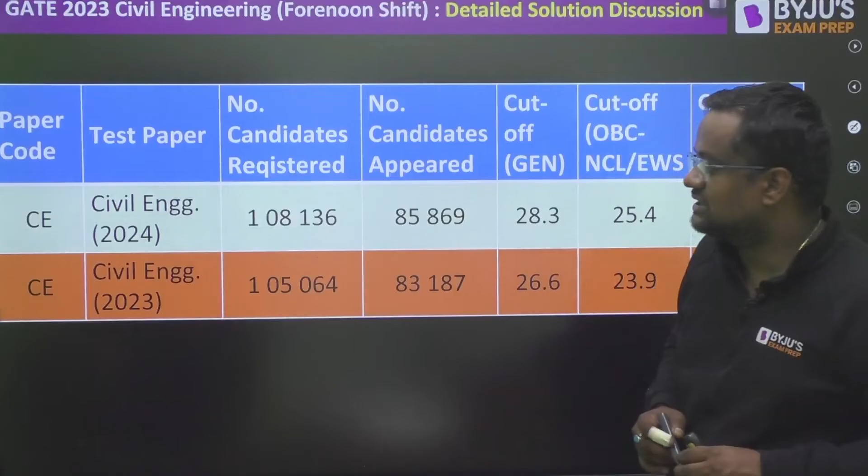This year IIT has declared that the total number of students registered for civil engineering is 1,08,000, and out of them, 85,000 students appeared for the examination. Compared to last year, more registration and more students have appeared.

In engineering services, almost 1/3 of the registered students appeared for the exam. Of course the exam is very big, so 2/3 of the students don't even go for the examination, but here the drop is around 15 to 16%.

Talking about the cutoff, the cutoff for general is 28.3 this year, for EWS and OBC it is 25.4, and for SC ST it is 18.8.

Of course, just clearing the cutoff will not help. You might get an NIT, but not of your choice or specialization. For getting IITs and PSUs, you should be scoring much higher than that.

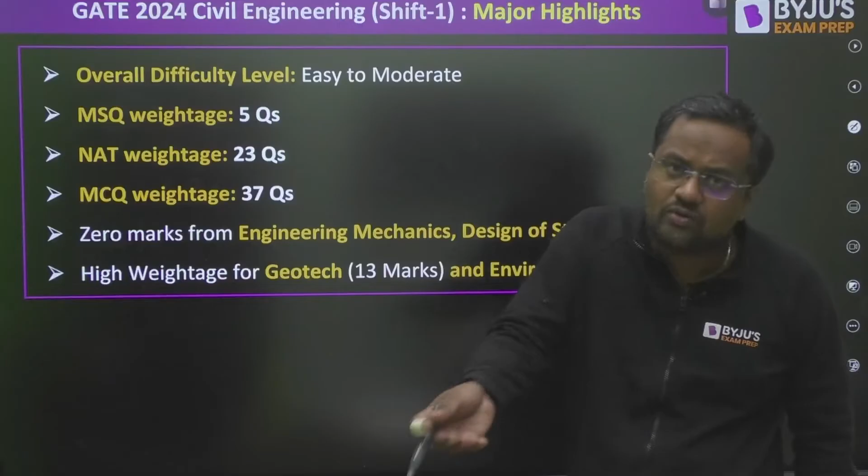Now about the paper, compared to 2023, in 2024 the paper was relatively easier. I'm not even saying moderate, it was relatively easier. The total number of MSQs were 5, NAT were 23, and MCQ questions were 37.

There was no question from engineering mechanics and design of steel structures in paper 1, and high weightage of geotech, which is expected, and environment, which is almost expected every year.

This is the analysis of paper 2. Of course, in the paper 2 video, when we do the complete 65 question solution, I will be discussing this in detail.

Now about the number of questions of each subject, aptitude is fixed, that has to be 15 marks, that is a guideline. Apart from that, everything is as expected.

Engineering mathematics was not of 13 marks, it was of 11 marks. Strength of material was 7 to 8 marks in both shifts. Engineering hydrology was 3 to 2.

Engineering mechanics had no question in paper 1, the forenoon section, but in paper 2 it was a 2 mark question. Geotechnical is the highest of all, 14 and 13. So this is the weightage.

In structural analysis there is no question in paper 2. Let me tell you one more thing here: if you see some other reference, you might feel some discrepancy from here. The data may be different because certain questions can be put in engineering mechanics category also, can be put in strength of material category also, and same for other questions in other subjects.

Like a question of well hydraulics, pumping the well, can be considered as a geotech question also, can be considered as a hydrology question also. So there may be some changes.

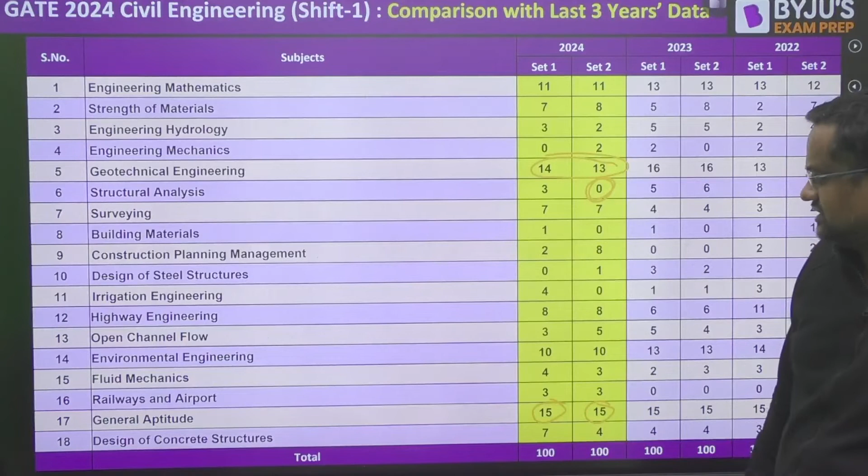So this is the weightage of each and every subject for 2024, and it is more like expected - environment and geotech are on the highest weightage, and subjects like CPM, building material, irrigation, steel are in lesser weightage. It is as expected, which is the average of the previous years as well.

Now in this video we'll be doing the complete solution of paper 1, complete 65 questions, which includes all subjects, mathematics, aptitude. So the complete video, these 65 questions, will be done in this video.

Also, if you want a reference of marks versus rank for 2024: at 85 marks the student is getting rank 1, around 70 marks you are getting rank 170, for 600 or 700 rank the marks is 60, for 1500 rank it is 53, and so on for others. You can take a reference from here.

Now the solution of forenoon aptitude will be done by Rakesh sir, and then we will be coming to the technical and engineering mathematics part. Complete 65 questions will be done. Thank you guys.

Let's get started with the discussion of general aptitude, 10 questions in the beginning, and then later on the technical questions along with engineering mathematics will be taken up by different faculties. Verbal won't take much time, let's spend time on reasoning and quant, that is where you need to understand.

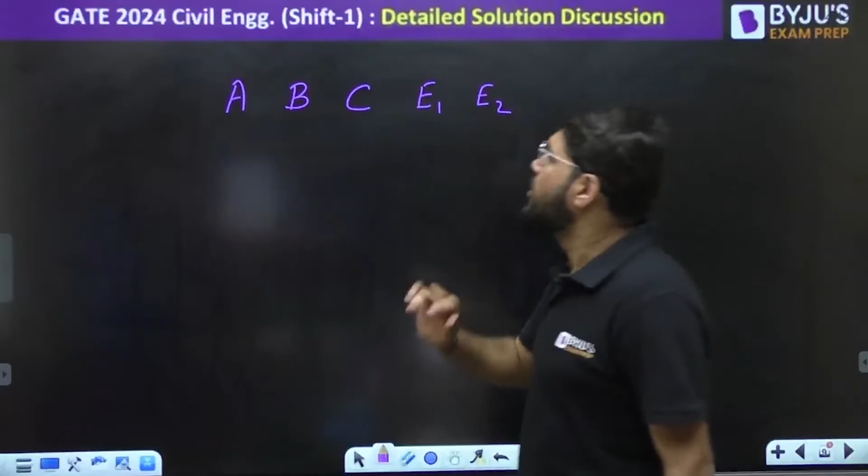Now the empty positions are also identical, na? Empty chairs - let's not call them E1, E2, let it be EE only. Hey, empty to empty, na? We cannot distinguish that also - like we cannot distinguish twins, we cannot distinguish the empty positions also. It is the same and same only. Done, hai ji?

Done, hai ji? Okay, fine. Empty, empty, empty - so we have A, B, C, E, E. These are the 5 bodies to be seated in the form of a circle. Okay, dekho.

Five units. Circular arrangement of 5 units is given by factorial of 5 minus 1. Circular arrangement of n items is given by factorial n minus 1. But out of which...

2 are alike, this E and E is same. A different, B different, C different. But these 2 empty spaces, you can't distinguish, they are same.

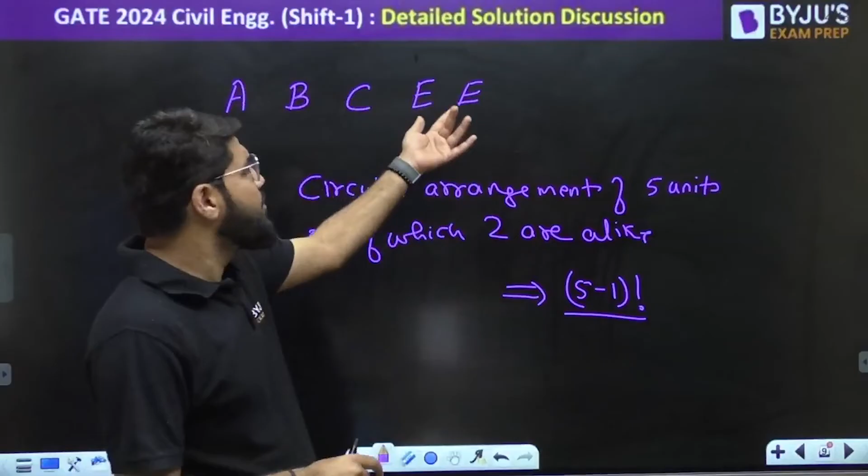So whenever 2 bodies are same, like we saw how many words can be formed using the letters of the word tattoo, where the letters are repeated. Similarly here, EE is repeated, 2 times, so divided by factorial 2. Factorial 4 is 24, divided by factorial 2, it is 12.

This is the simplest way of solving. Otherwise, like this, you will keep solving.

Now here also, this is one possibility I told you. Then ABC can be shuffled, A, B, C, or A, C, B. There will also be multiple possibilities. So then next, these 2 spaces here, then I told you a space maybe between B and C also. So if you form these cases, then also 12 will come, but that is lengthy.

This was just for explanation, that is the simplest way, logic of solving the question. Answer is option number A. The correct answer is option number A. I'm done with it. The correct answer is option number A.

12 came, correct. Number 8. Oh, a question on data interpretation.

The chart given below compares the installed capacity in megawatt of 4 power generation technologies T1, T2, T3, T4 and their electricity generation in megawatt hour in a time of 1000 hours. The capacity factor of a power generation technology is defined as electricity generation in megawatt hour divided by installed capacity into 1000, because that is for a time of 1000 hours. Which of the following technology has the highest capacity factor?

Let's keep it simple. What is the capacity factor equivalent to? It is equivalent to, since 1000 is constant, electricity generation. Now if you come to this bar chart, electricity generation is noted by cross, and this capacity factor is proportional to this cross divided by installed capacity.

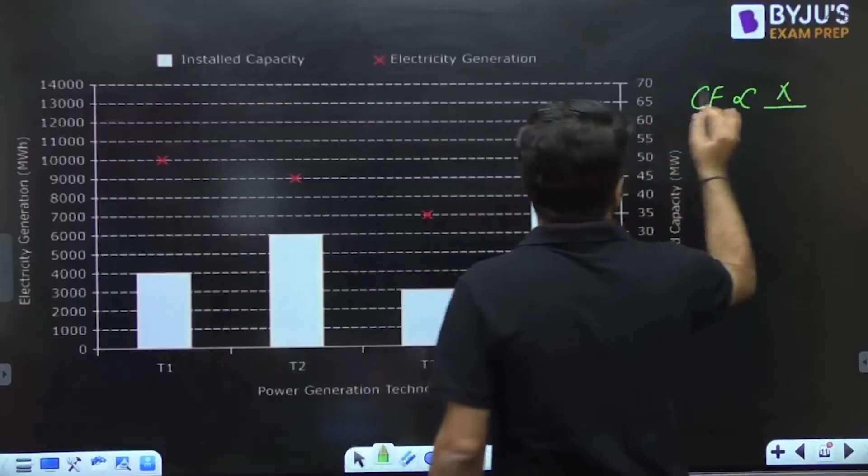This is electricity generation divided by installed capacity. What is the installed capacity? That is represented by the bar. Clear? I'm not dividing by 1000, because that is why I'm writing proportional to, since I don't want the absolute value, I want to know where it is highest, and 1000 will come in all of them anyway.

Let us calculate the ratio of cross and box for T1, T2, T3, T4. For T1, how much is it? Cross 10,000 upon 10 by 4, 1000 also cancels, so 10 by 4. The ratio will be 10 by 4.

For T2, that is 9 by 6, that is 1.5. T3 is 7 by 3, so this is 2.33. Writing it down, this is 1.5, this is 2.5. And T4, what is the value of T4? It is 12 divided by 8, that is further 1.5.

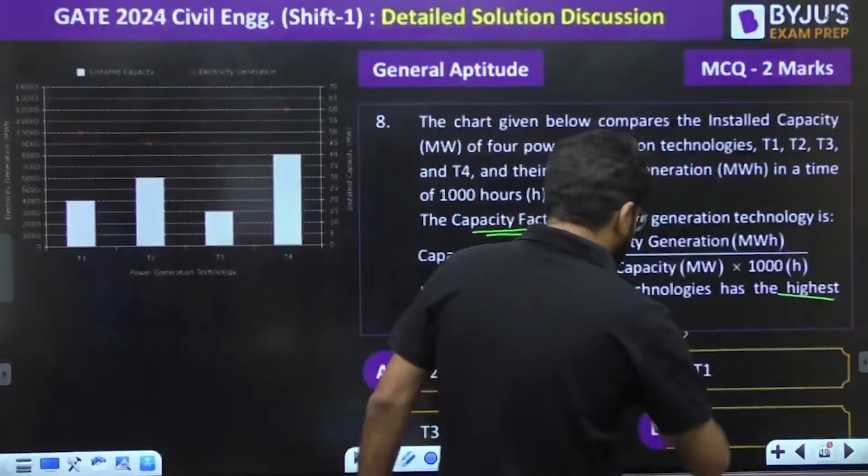So which of them is the highest? T1, it is highest for T1, 2.5. The answer is B, T1. Done? This is also a very fundamental question of DI, just like a reading comprehension. Just have to read and see which is the highest, calculations are also minimal only.

Next, ninth one. In the 4x4 array shown here, each cell of the first 3 columns has either a cross or a number, that's what is visible, as per the rule given below. What is the rule? Please highlight that rule: the number in a cell represents the count of crosses around its immediate neighborhood cell.

Now what is the neighborhood? Left, right, top, bottom, diagonal, anything. Like suppose if this is a box, complete neighborhood, so this is like all four directions. Neighborhood means anywhere around it. So what is that rule? The number in a cell represents the count of crosses around its immediate neighbor. As per this rule...

The maximum number of crosses possible in the empty column, how many crosses can be here? Come on everybody, very simple analysis question. Now like here it is 1. I'll explain you again. Here it is 1 means in its neighborhood, look, this is its neighborhood.

Yahan to kuch hai hi nahi. So in its neighborhood there should be 1 cross. Yes, there is only 1 cross.

Okay, like this entry is 2. So this is the neighborhood of 2 and around it should be 2 cross. Yes, these are the 2 crosses like that.

Okay, so now here 2 is written. So around it there should be 2 crosses. What is the neighborhood of 2? Okay, ye aa jayega poora. This is the neighborhood. Diagonals are also included na.

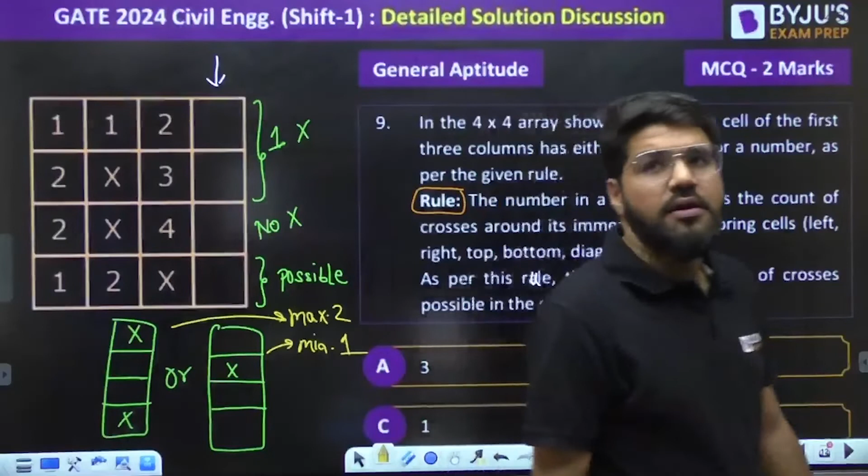Next question, 10th one for the aptitude. Okay, now during a half moon phase, the earth, moon, sun form a right angle triangle. Okay, the only good thing is this understanding of language, a very fundamental question. Okay, so many students felt that it is difficult.

Isme data kuch aur chahiye hoga ki no, it is a very basic question. Dekho, during a half moon phase, the earth, moon, sun form a right angle triangle. Okay, so let me also form it. Okay, earth, moon and sun.

Earth, moon and sun, they form a right angle. If the moon earth sun angle, okay, moon earth, chalo, let me place the earth here.

If the moon earth sun angle at this half moon phase is 89.85, this angle, it has to be extremely big. I mean, if I delete everything, the picture is something of this kind. Okay, this is also a big angle.

Okay, so let's say this is the moon. Okay, and this angle 89.85 degree is coming up, okay, at the moon earth sun. Okay, so this angle is going to be very negligible. Okay, and this is a right angle.

Okay, then what is the ratio of the earth sun? Okay, earth sun. Okay, this is the earth sun. Okay, and the earth moon, let me call it as EM. What is the ratio of these two distances?

Hello dear students. So after this aptitude section of total 10 questions, now let us do the technical part. I'll be taking subjects like strength of materials, then surveying, highway engineering, railway, airport engineering. And then of course after me, Chandrasekhar sir and Richa ma'am will be taking other subjects. So total 65 complete questions will be done. And of course guys, as we are recording this video after the updated answer key, in questions where MTA or the range have been increased, we'll be telling about that as well.

Let us begin with SOM guys. This was an MCQ question of 1 mark, asking to find the maximum shear stress. As guys, they have given the stress tensor in 3D, that means they are asking for tau absolute maximum, because the stress tensor is in 3D. So tau absolute maximum is given by the maximum of (sigma 1 minus sigma 2)/2, (sigma 2 minus sigma 3)/2, (sigma 3 minus sigma 1)/2. This is the tau absolute maximum.

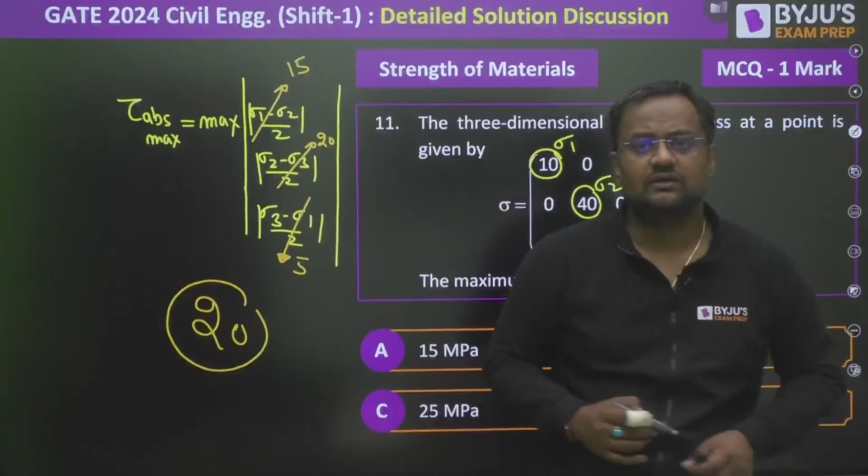As all the shear stress values are 0, therefore these are the principal stresses: this is sigma 1, this is sigma 2, this is sigma 3. So sigma 1 minus sigma 2, that is 10 minus 40 by 2, is 15. 40 minus 0 by 2 is 20, and 10 minus 0 by 2 will be 5. So maximum of 15, 20 and 5 will be 20. So guys, the answer to this maximum shear stress MCQ question will be B, that is 20. Everyone can score 1 mark easily here.

Now guys, question number 12, we have to match the correct pair. Let us first see P. Here sigma x is 10, sigma y is 0. Center will be (sigma x plus sigma y)/2. Guys, center is given by ((sigma x plus sigma y)/2, 0). Center is always on the x-axis.

And radius is given by either (sigma 1 minus sigma 2)/2, or the more general form: square root of [(sigma x minus sigma y)/2 squared plus tau xy squared]. This is more general because if tau is 0, then it reduces to (sigma 1 minus sigma 2)/2. So for P, the center will be (sigma x plus sigma y)/2, that is (10 plus 0)/2, which is 5. And radius will be square root of [(10 minus 0)/2 squared], that is 5 squared plus 0, so it is under root 25, giving radius 5. So this represents center (5,0), radius 5, so the diameter spans up to 10 here.

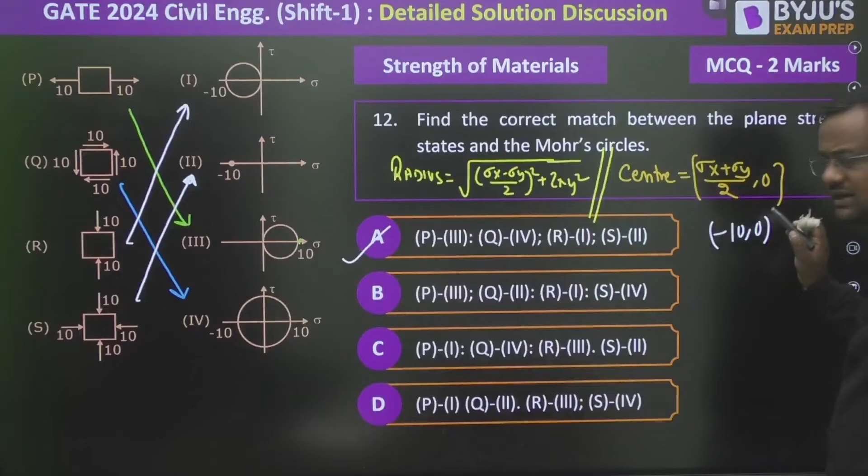It is of 2 marks, but compared to 2 marks, it is not that tough. Those who have done a reasonable preparation can do this question easily.

Now guys, question number 13. Here we have to find these reactions. So see, this will be RA, let this be RB, let this be RC.

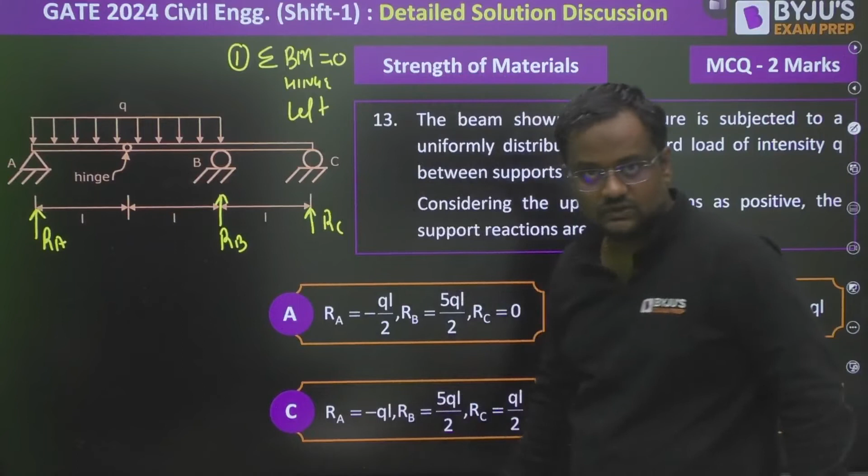Now whatever equations we have, the first equation is that summation of bending moment at the hinge is equal to 0. So do this from the left, you will directly get RA. Let me show you guys.

Taking bending moment about RA: RA into L, and this total is QL, downward means negative. QL into L by 2 is equal to 0. So RA value is equal to QL by 2.

So even from the RA value, this and this will not be the answer. Only B and D can be there. This is the first equation.

Second equation: summation of moment, not bending moment guys - bending moment at the hinge is 0, but at any other interior point, moment will always be 0 for equilibrium. So summation of moment at B is equal to 0. This you have to take from left and right both, because it is moment, not bending moment. For bending moment we only took from the left. Moment at every point will be 0 for equilibrium.

So here, in this equation only RC will be coming. So you can find RC from here.

Now this is the second equation, and the third equation is summation Fy equal to 0. So RA plus RC plus RB is equal to downward load Q into 2L. RA and RC are fine, so you can find out RB from here. So guys, B will be the answer from these three equations.

Question number 14. A homogeneous shaft was given, both ends fixed. The polar moment of inertia of portion PQ is J1 and of QR is J2. Support reactions are TP and TR. Let the TP value be here as torsional vector, and let TR be here.

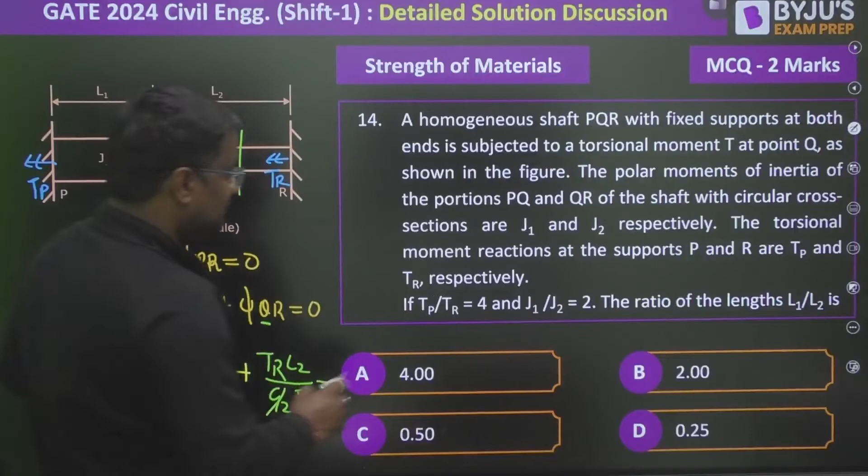Homogeneous, so G1 and G2 are same. Now TP is 4TR, so TP I can write as 4TR. 4TR L1, and J1 I can write as 2J2 from here. 2J2 is equal to TR into L2 upon J2. J2 cancelled, TR cancelled. From here guys, L1 by L2 value is 2 by 4, that is 0.5. That is option number C.

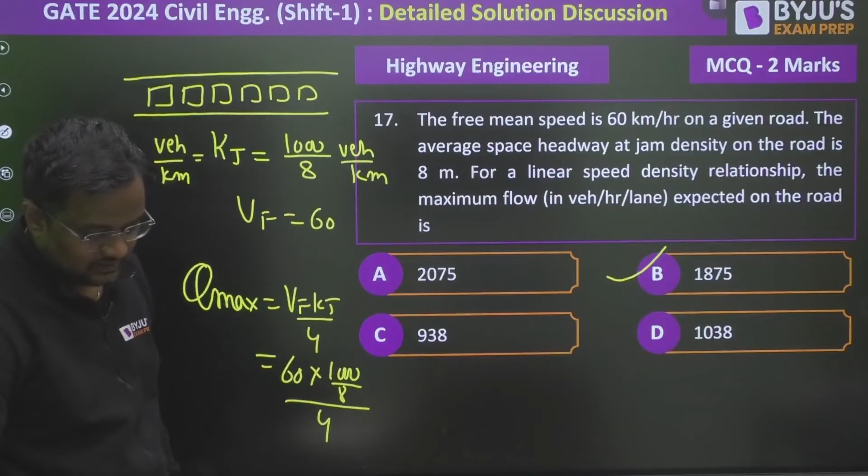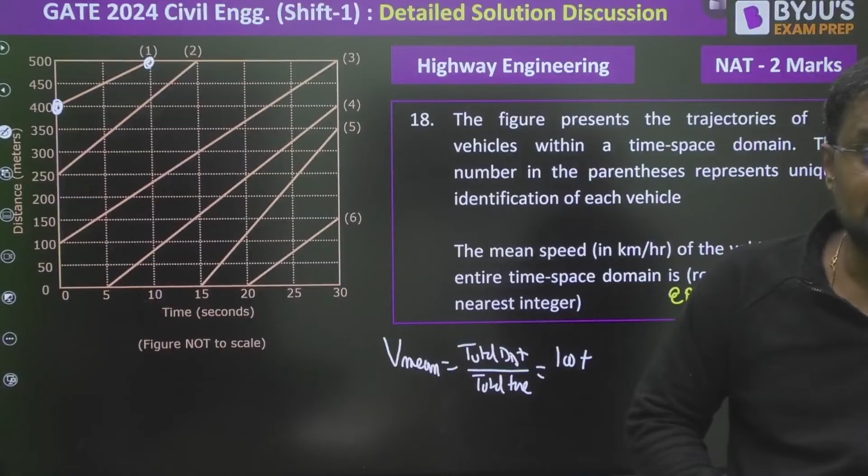Okay, so guys, here the mean speed is calculated as V mean equals total distance by total time. So the distance, this is covering from 400 to 500, it is going from 400 to 500, so 100 distance. 400 meters, the vehicle A was there and it has gone to 500, so distance is 100. Now what is the time it's taken?

It starts at t equal to 0, and at t equal to 10 seconds the journey ends. So guys, it is taking 10 seconds. Now let me talk about the second vehicle.

It starts from 250 and goes to 500, so it is going 250 meters. And how much time is it taking? From 0 to 15 seconds.

Now the third vehicle goes from 100 to 500, so how much is it going? 400. And how much time is it taking? From 0, it is covering to 30 seconds.

Now the next vehicle is going from 0 to 400, so the distance traveled by the vehicle is 400, and the time is taken from 5 to 30, so it is 25 seconds. Now after that, the next vehicle is from 0 to 350.

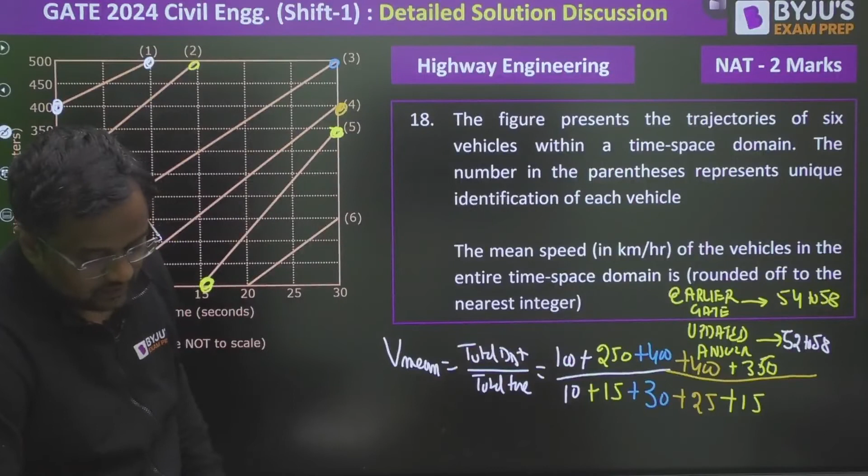Okay, and how much time is it taking? 15 seconds. Okay, now how many for the last vehicle? Last vehicle from 0 to 150. So 150, and how much time is it taking? 10 seconds. Okay, so guys, from here the average speed you will be getting is 15.7 meter per second.

These values are in meters. So you will be getting 15.7 meter per second. Okay, and if you convert 15.7 meter per second into kilometer per hour, this value comes to 56.57 kilometer per hour. And they have taken the reading as 52 to 58, the updated answer.

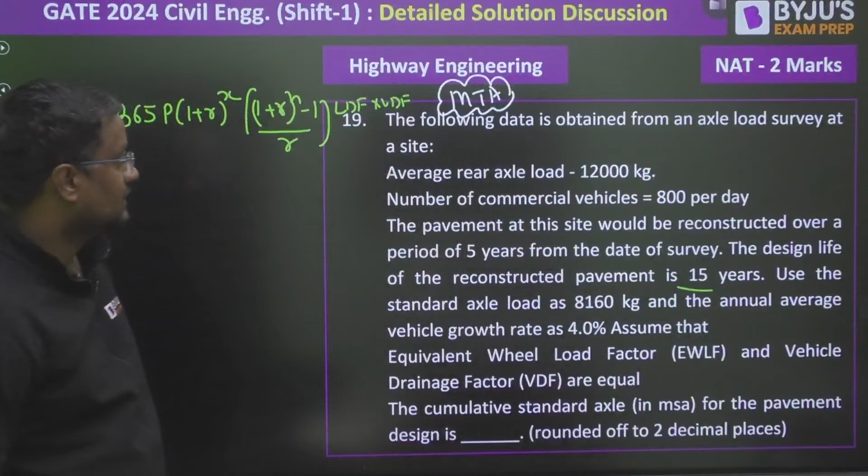Present traffic R is given as 4%. N is 15 years, so (1+R)^N. Number of commercial vehicles is 800 present traffic. Construction period is 5 years. So everything is given. And what is VDF?

VDF, they have asked that you can take as the equivalent wheel load factor. What is equivalent wheel load factor? 12,000 and standard vehicle is 8160. So VDF you can take as (12,000/8160)^4.

LDF was not given. Although some students have taken it as 1, but majority of students have challenged that if LDF, the lane distribution factor, is not given, why should we take it as 1? That is why it was marks to all. Otherwise the correct approach is this.

Okay, now building material, guys, this was an MSQ. The elements that do not increase the strength. Carbon increases the strength, guys. As carbon percentage increases, the ductility decreases. In less carbon percentage, it is more ductile. In more carbon percentage, Young's modulus is the same, but it can take more stress, but ductility is less. Again with more carbon, it can take more stress, but again ductility is less. This less carbon percentage fails at maximum strain.

Okay, so guys, carbon and manganese are the things which do not take any effect, oh sorry, they do change the strength. The correct answer will be chlorine and sulfur. They do not increase the strength. Chlorine and sulfur will be the correct answer.

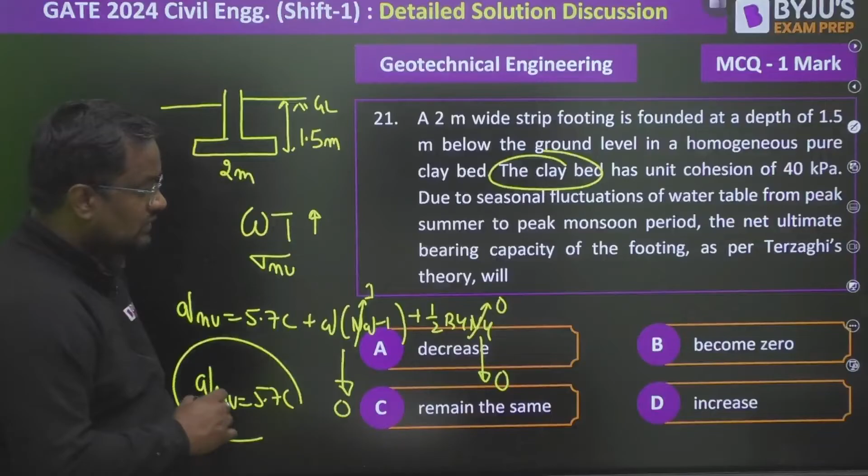In monsoon period, water table will increase. Then what effect will be on the net ultimate bearing capacity? Now guys, the formula of the net ultimate bearing capacity for clay is 5.7C, because the Nq and (Nq-1) term, and Nq for clay is 1, so that term becomes 0, plus half B gamma Nγ, and Nγ is also 0, so these terms become 0 and 0, so it is only 5.7C. So there is no effect of water table in this first term. So Qnu is 5.7C. There is no effect of water table here, so it will remain unchanged, the same. In clay case, guys, even if you take the monsoon season or dry season, that will not change. It will be the same. That is option C.

Now moving to next question, geotechnical. Again an NAT question of 1 mark. Let me remind you, there is no negative marking for NAT and MSQ questions. An embankment is constructed with soil maintaining degree of saturation at 75%, so S value is 0.75 during compaction. The specific gravity of the soil is 2.68 and the moisture content is 17%, that is 0.17. Consider unit weight of water - unless mentioned, we always take unit weight of water in any subject, whether fluid mechanics, hydrology or soil mechanics, we take 9.81, but here it is given as 10, so we will take 10.

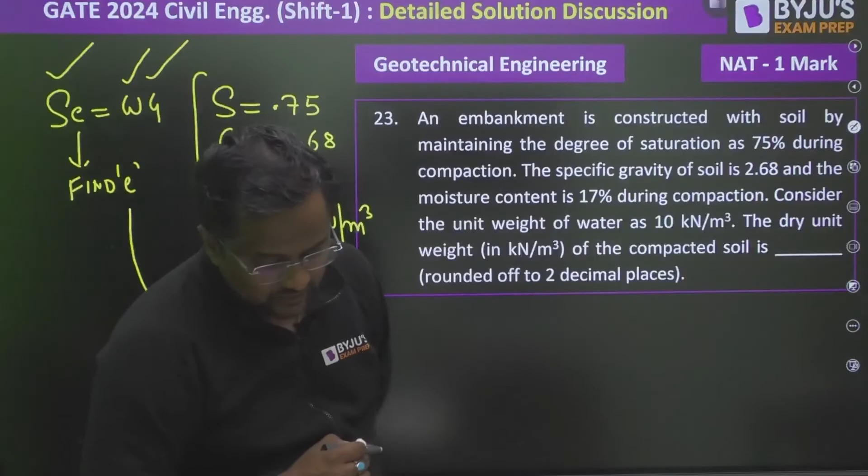What is gamma D? Gamma D value is G gamma W upon 1 plus E. Now G is known, gamma W is known, E we have to find out. From these three terms, we know SE is equal to WG. S is known, G is known, W is 0.17. Find E from here, and once you find E, put it back to get gamma D. That value comes to around 16 point something. As per IIT, the range given is 16.6 to 16.8. From here we get the value around 16 point something in that range, rounded off to 2 decimal places. So 16.60 to 16.80 is given - any 2 decimal value in between will be treated as correct, like 16.63, 16.65, any value will be taken as correct.

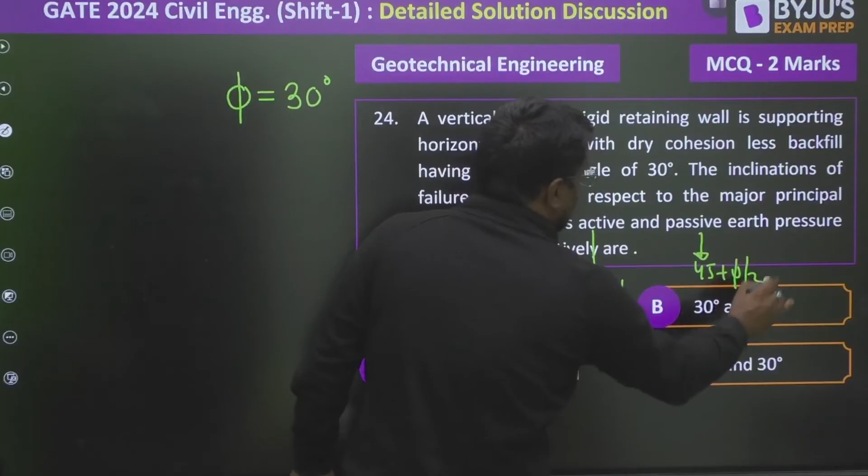Now again a question, MCQ of 2 marks. A vertical smooth rigid retaining wall is supporting horizontal ground with friction angle 30, so phi value equals 30 degrees. The inclination of failure plane with the major plane for active and passive case - whether it is active case or passive case. From the major plane, the angle is 45 plus phi by 2, I have derived this many times. On the minor plane it is 45 minus phi by 2, in both active and passive cases. So for both planes it is 45 plus 30 by 2, and 30 by 2 is 15, so it is 60 degrees for both cases.

Now again a database question, not much concept. Which of the following statements are correct? That is an MSQ of 2 marks. Soil potential decreases with increase in shrinkage limit - if you compare two soils, the one having higher shrinkage limit will have less potential. Both loose and dense soil with different initial void ratios attain a similar void ratio at large strain, called critical void ratio. I hope you have seen this - loose sand has higher E, dense sand has lesser void ratio, and as we shear, both converge to the same point, that is critical void ratio. So A and D are correct.

MSQ again, there is no negative marking.

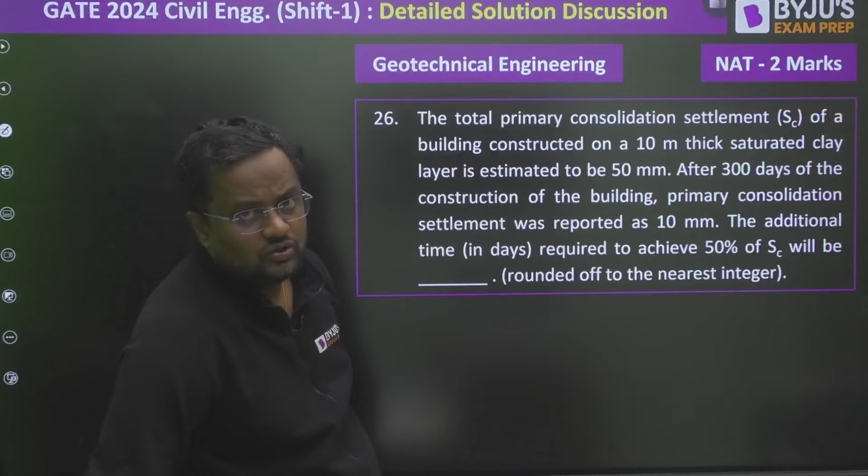Now, the total primary consolidation settlement of a 10 meter thick clay layer is 50 mm. After 300 days of construction, primary consolidation was 10 mm. So what was the degree percentage U? Percentage U is how much settled upon the total settlement into 100. So that value comes to be 20%. So for 20%, how much time is it taking? 300 days.

300 days, and what's the additional time after this to achieve 50% consolidation, percentage U of 50? Now, TV is equal to CV into T by D square. For the same soil, CV and D will be same, so TV is directly proportional to T. So TV is directly proportional to T, and TV is pi by 4 U square, this is less than 60%, that is also less than 60%.

So pi by 4 U square. From here, U1 square by U2 square is directly proportional to T. So U1 square by U2 square is equal to T1 by T2, correct? Because U square is proportional to T, so U square by T is constant. So U1 square by U2 square is equal to T1 by T2. U1 is 20 square, this is 50 square. For 20% consolidation, 300 days is asked, and here T2. So T2 from here you will be getting as 1875 days.

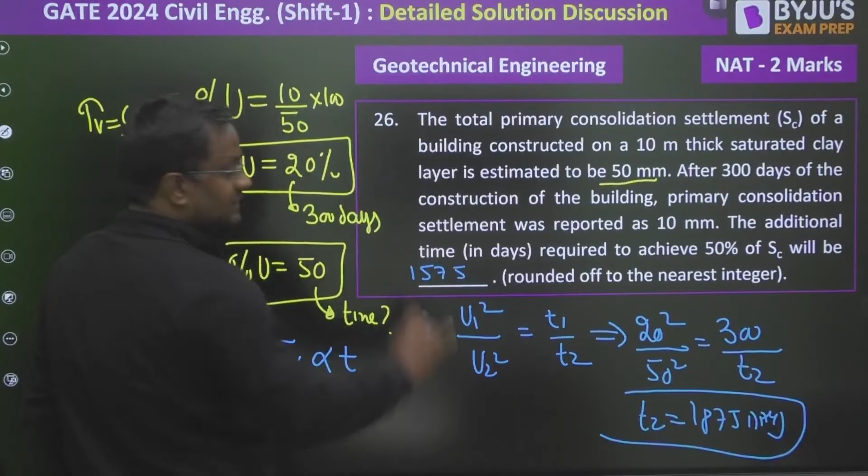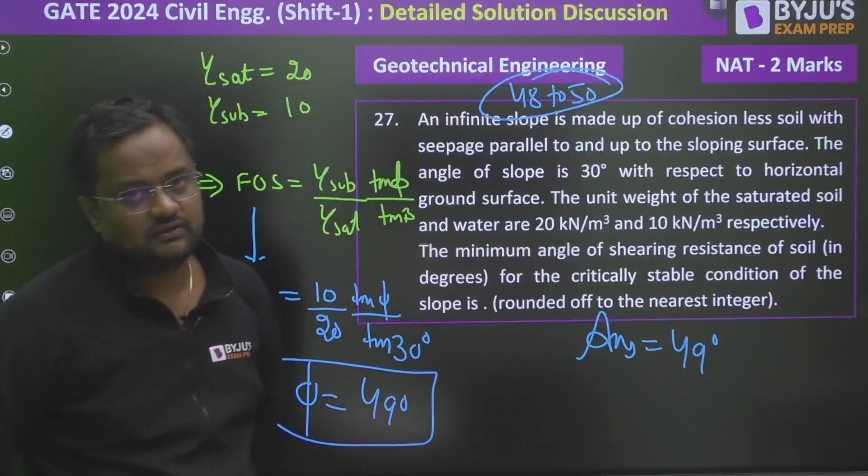Critical condition means factor of safety is equal to 1. Factor of safety is equal to gamma submerged upon gamma sat into tan phi upon tan beta. For critical condition, the factor of safety will be equal to 1. Gamma submerged is 10, gamma saturated is 20, tan phi, and slope is 30 degrees. From here, one equation, one unknown, you can find the value of phi. Phi value is 49.1, rounded to the nearest integer, so 49 degrees. Answer is 49 degrees. The range given by IIT is 48 to 50 acceptable, so if you write 48, 49, or 50, all get the full 2 marks for this question.

Now, everything given, and they are asking for the Skempton pore water pressure parameter B. What is B? B is change in pore water pressure with change in cell pressure. The pore water pressure is 1 kilopascal, earlier it was 0, so 1 minus 0 is 1. Delta sigma 3: earlier the cell pressure was 20 and now it's 30, so 30 minus 20 in the denominator. So B comes to 0.1. Answer is equal to 0.1, and they have given the range 0.09 to 0.11.

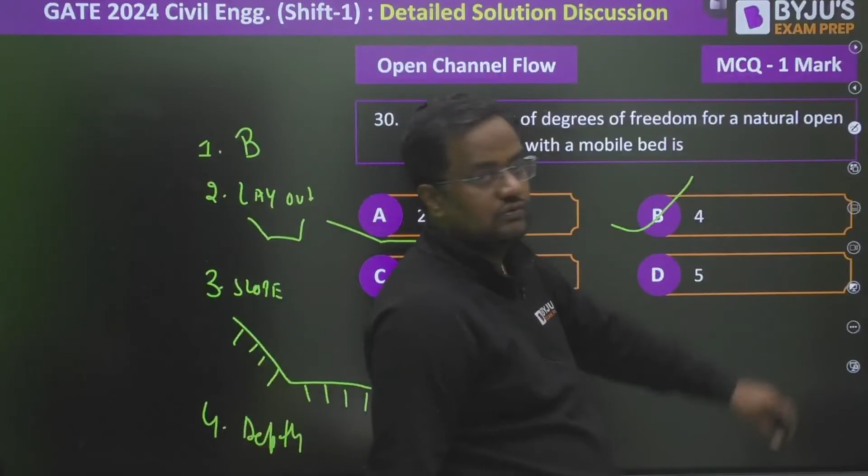Slope will be changed, guys. In my village in Uttarakhand it's going like this, but in Allahabad slope is almost 0 degree. In mountain, slope is more, so width may change, layout, slope, and fourth is depth. Depth of water may be changing due to various fluctuations such as the cross section and also the rain and monsoon season. So 4 degree of freedom is there, meaning how many things can be changed.

Now guys, a spillway. This is a spillway. Water is coming in this spillway. They have given from here, hydraulic jump is there, like this.

So what is y1? Y1 is equal to, the flow depth at the downstream is 0.5 meter. So here will be y2. Now the tailwater depth is asked. So from y1, guys, can you find the velocity at 1?

Velocity 1 is discharge by area. So q by b is small q by y, unit meter cube per second per meter. So v is 7.5 by 0.5. So v1 is equal to 15 meter per second.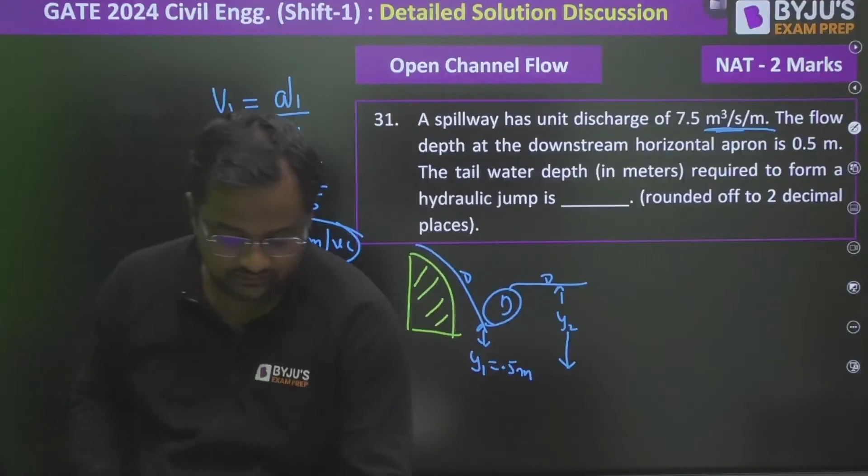Once you find the value of v1, guys, from here you can find the Froude number at section 1, section 2. Froude number is v by root g y1. Nothing is given, so we are considering it rectangular. So Froude number 1 is 15 by root of 9.81 into 0.5, which comes to 6.7, greater than 1. So yes, it is supercritical at the pre-jump depth.

Now apply the Bélanger's momentum equation: y2 by y1 is equal to half of 1 plus root of 8 f1 square minus 1. f1 is known, y1 is known. You can find the value of y2, that is 4.54 meter. y2 is equal to 4.54 meter, that is the answer. As per IISc Bangalore, they have given the range from 4.4 to 4.7, so any value from 4.40 to 4.70 will be treated as correct.

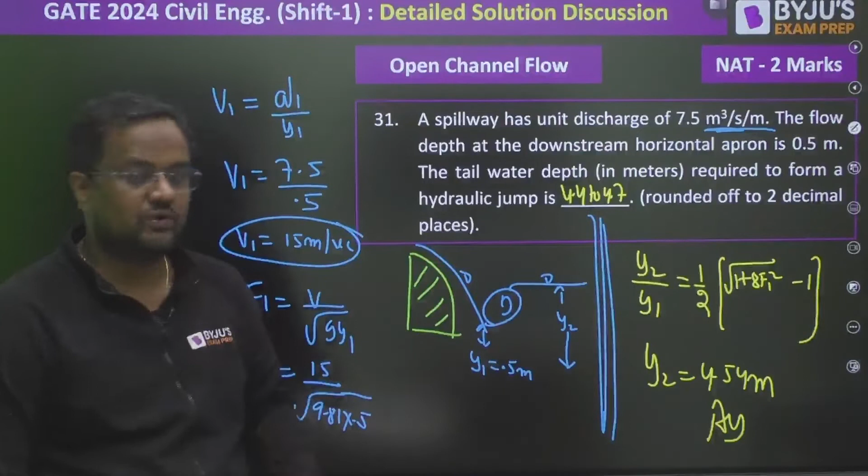First of all, guys, let me find out the V mean. It is 20 trains of 40 speed plus 15 trains of 50 speed plus so on, 3 trains of 80 speed, divided by total number of trains 20 plus 15 plus 3. So the V mean value you will be getting from here, guys, is 52.93 km per hour.

52.93 km per hour is the V equilibrium. Now the equilibrium cant is asked. Equilibrium cant formula is G into V equivalent square, this formula is for kilometer per hour, into 127. What is G? What is the distance? 1750 mm, so in meters it is 1.75. So 1.75 into 52.93 square divided by 127 into R, R is 437. What value are you getting from here? 88.3. Nearest integer they are asking, so you can write 88.

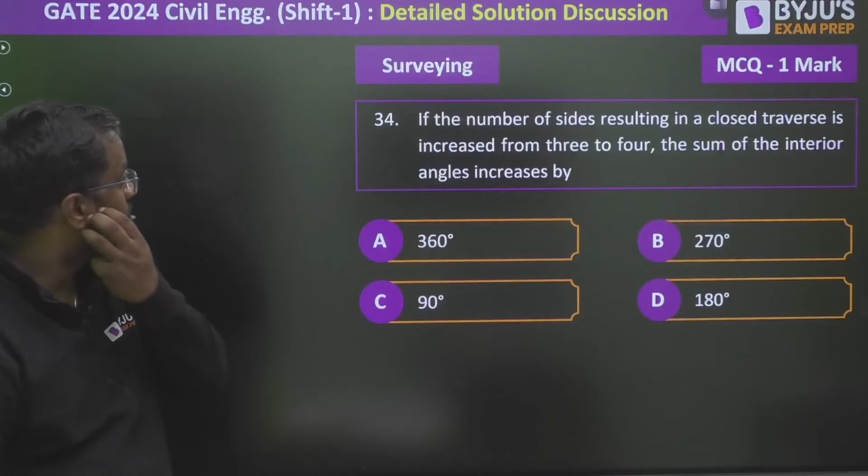Okay, now 3 to 4. Guys, in a triangle (3 sides), what is the sum of interior angles? 180. In a quadrilateral (4 sides), what is the sum? 360. So what is the increase? The increase is by 180 degree.

Now, among the following statements related to the transit theodolite, which of the following statements are correct? We have to find the correct statement. It's an MCQ. So guys, the line of collimation must be perpendicular to the horizontal axis - this is the correct statement.

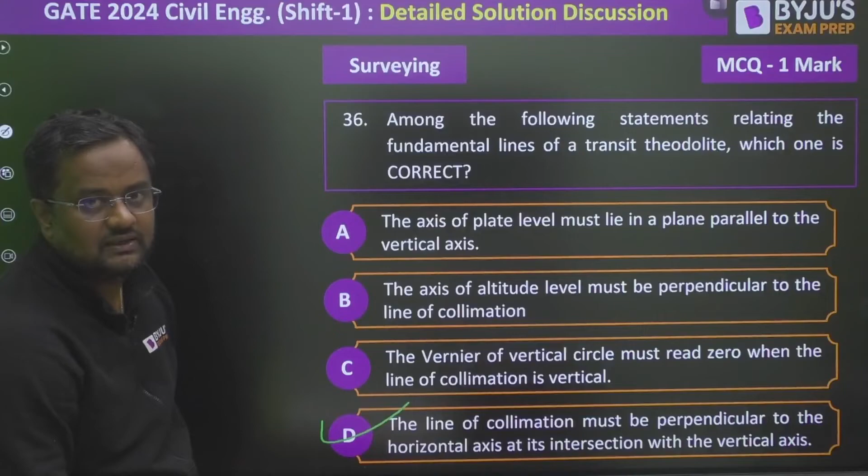Now guys, a map is prepared with a scale of 1 in 1000. Suppose this is a map. Contour intervals are at 1 meter interval, these contours are having a 1 meter interval, so height difference is 1 meter. Now the distance between them in the map is 10 mm. So what is the ground distance?

10 into scale, this much mm, so 10,000 mm. So 10,000 mm means 1000 centimeter ground distance between these two. 1000 centimeter means 10 meter.

So in 10 meter horizontal, what is the difference coming? Contour interval is 1 meter. The height difference is 1 meter. In 10 meter, 10 mm is equivalent to 10 meter in ground from scale. In 10 meter we are going 1 meter.

So in 100 meter if you go, how much above we go? For 10 meter it is 1 meter. So for 100 meter it is 10. So 10%. For 100 horizontal distance we will be going 10 vertical.

Okay, now question 38 of surveying, 2 mark NAT question, and the range given by IIT is 10 to 10. Anything other than that will be treated as wrong answer.

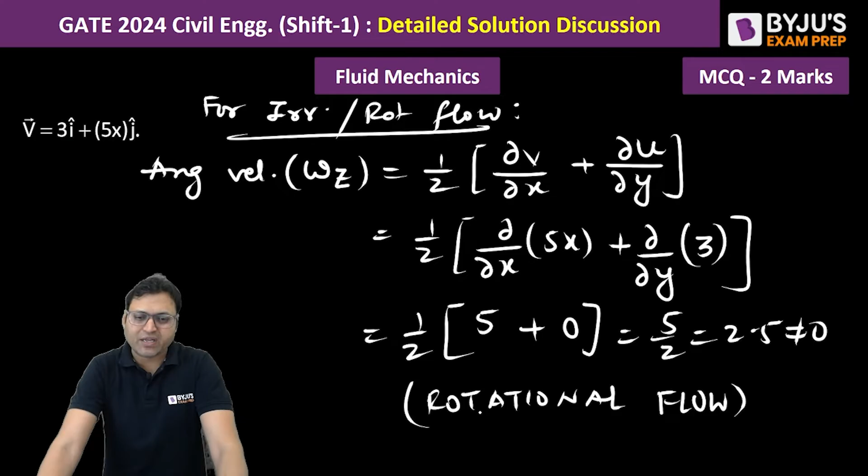Because it is non-zero, that means the flow is rotational. Because the angular velocity is not 0, the flow is rotational. The correct answer is flow is incompressible but rotational. Option C is the correct answer for question number 39, MCQ for 2 marks.

Let us move to the next one. I hope this is clear. The next question was very beautiful. NAT for 2 marks. A 5 meter by 5 meter closed tank of 10 meter height. This is the tank. There is a closed tank of 10 meter height, total height is 10 meter: 4 plus 4 plus 2.

It contains water and oil. The bottom fluid is water and the upper fluid is oil. It is connected to an overhead water reservoir, as shown in the figure. This is the same level as the interface.

Use specific weight of water as 10 kilonewton per meter cube, so we can say the density of water is 1000 kg per meter cube, and acceleration due to gravity should be taken as 10 meter per second square. Specific gravity of oil is 0.8.

The total force in kilonewton due to the pressure on the side PQR of the tank is to be found. PQR is a side like this. This is 5 meter, this is also 5 meter. The tank is something like this.

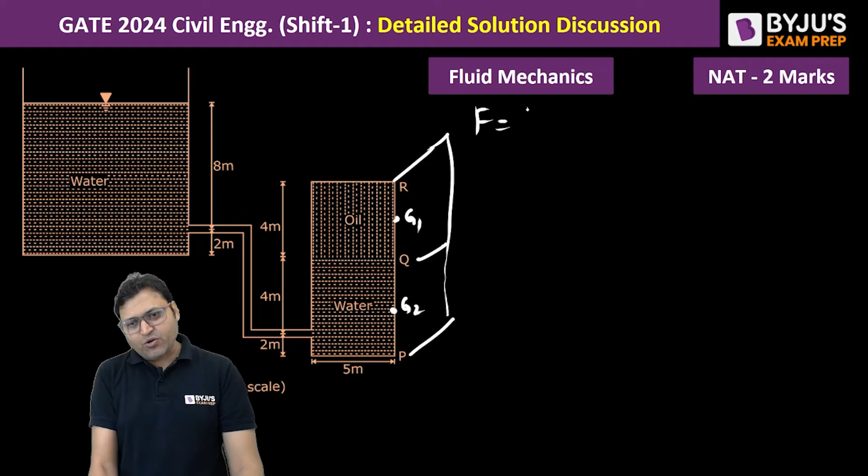If you are able to calculate Pg1 and Pg2, pressure at G1 and pressure at G2, then we can easily find out the force. The force will be pressure into area. So the force will be equal to Pg1 into area A1. This is 5 meter, this is 4 meter.

So area A1 will be 4 into 5, plus pressure at G2 into this area. What is the area? That is equal to height 6 into 5. So Pg1 was 84 into 20 kilonewton, plus Pg2 was 130 into 30 kilonewton, that is 1680 plus 3900 kilonewton will be the answer.

So if you simplify this, then it will be 5580 kilonewton, which will be the force exerted on the surface PQR by the pressure of the oil and water. I hope this is clear. So 5580 will be the final answer for this.

So these were the two questions asked in the forenoon session. That is all from my side for fluid mechanics. Now I would like to invite Richa ma'am for discussing the solution to her subjects.

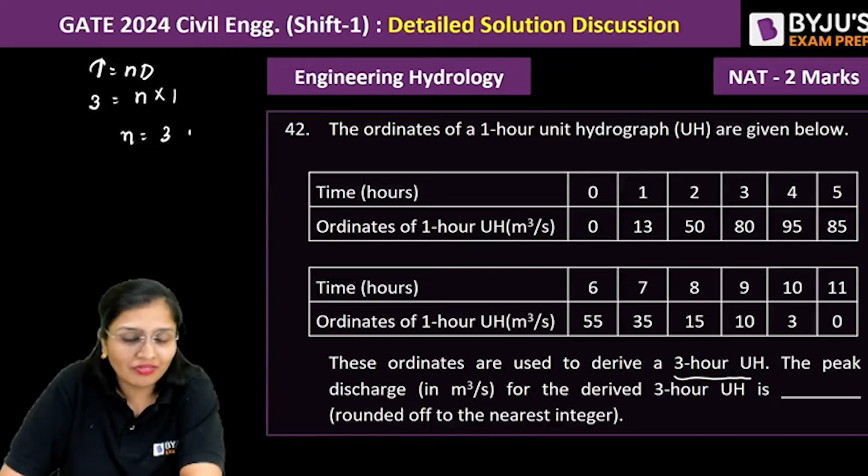First, for knowing whether you should do it by S curve or by method of superposition: the hour which it is asking is 3 hours, the hour which is given to you is 1 hour. So n is equal to 3, which is an integer, so you can apply method of superposition.

You can apply method of superposition. Okay, now how we'll apply, let's check it out. So the data, if it is here, will it be difficult for me to draw the diagram? So let's keep it aside and let's draw it. This one also, let's do it. Okay, so now let's start. To keep it realistic, I am also drawing freehand, because obviously when you will be doing it, you won't be doing it with a ruler and all.

Ordinates of 1 hour unit hydrograph: the gap given to you is 1 hour, up to 11 hours - 0, 1, 2, 3, 4, 5, 6, 7, 8, 9, 10, 11. I personally tell you to just draw lines like this, because nobody is telling you to have a straight line, but just have this, so that if any values go here and there, it won't be a trouble. Okay, so that is the reason I tell you. So the ordinates of the 1 hour unit hydrograph are: 0, 13, 50, 80, 95, 85, 55, 35, 15, 10, 3, 0.

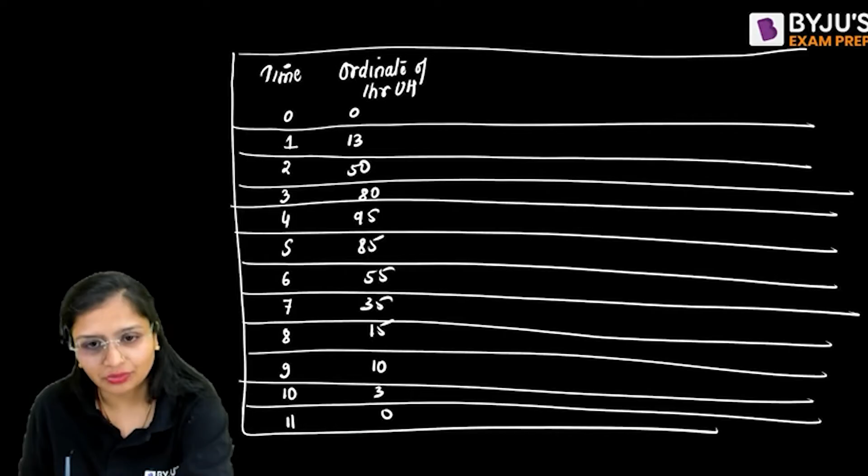So now, instead of calculating the 3 hour unit hydrograph directly, first you will calculate the 3 hour direct runoff hydrograph. How? First 1 hour unit hydrograph will end, then another 1 hour unit hydrograph will start, lagged by 1 hour. So just 0, 13, 50. It's like this - first 1 hour will end, unit hydrograph 1 centimeter, then this will end, then another will start, as I told you. When this 1 hour ends, another 1 hour starts, lagged by another 1 hour. Now again copy paste the same thing, by the logic of time invariance.

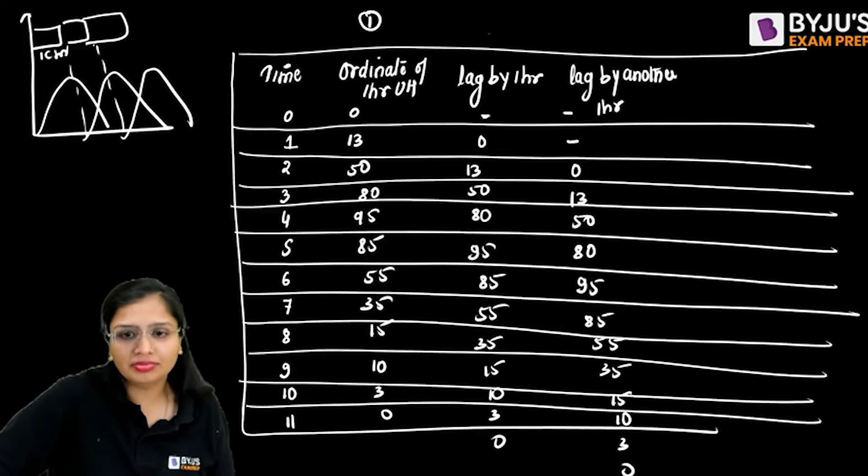Zero. Now this is the first column, this is the second column, this is the third column - 1 hour, 1 hour, 1 hour; 1 centimeter, 1 centimeter, 1 centimeter. So what will you get? You will get the 3 hour direct runoff hydrograph, and since it is unit hydrograph 1, 1, 1 with n equal to 3 centimeter, so add it: 0, 13, this will become 63, and then it is 80 plus 50 plus 13, so this will be 143.

Then 95 plus 80 plus 50 equals 225, and then 85 plus 95 plus 80 equals 260, 55 plus 85 plus 95 equals 235, then 35 plus 55 plus 85 equals 175, 15 plus 35 plus 55 equals 105, then 60.

28, 13, 3. Okay, this is the 3 hour direct runoff hydrograph, but you don't need the 3 hour direct runoff hydrograph. You need the 3 hour unit hydrograph. So for n equal to 3 centimeter, this much is the value.

So for n equal to 1 centimeter, what will be the value? Divided by 3. 0 by 3, 13 by 3. Obviously you don't need to calculate, because you can see they are asking you in the question for the maximum value.

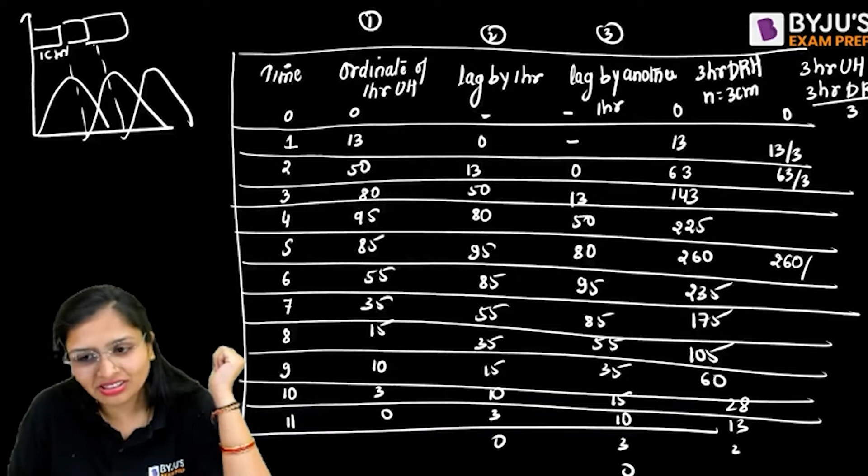Peak discharge means the maximum. You can see the peak which you will get will be like 260 by 3, because if you divide it, naturally you will get a higher value. So 260 divided by 3, you are getting it as 86.66. If you check others, you'll divide and get a lesser value for sure.

If you want to waste your time doing it, you can, but that's common sense you can apply. 175 by 3, 105 by 3, 60 by 3, 28 by 3, 13 by 3, 2 by 3. So you will see 86.66 meter cube is the peak discharge.

Now in the question it is asking you to round off to the nearest integer, so 86.66 meter cube per second rounds to 87 meter cube per second. If you write 86.66, you won't get the marks, because deliberately the question tells you to round it off to the nearest integer. Why would you write it in decimals?

Okay, so this is the question. Now let's move towards environment. Let's solve the first question of environment.

Here they have given a table of municipal solid waste and separation techniques, and you have to match the following. Now ferrous materials like iron are commonly separated using a magnetic separator, so it's common that P will be 4. So either it will be option A or option D, let's check.

Q is aluminium and copper. Generally you use eddy current separators, by the help of which if aluminium and copper are present in municipal solid waste, they can be removed. So Q is 3, it's there in both options.

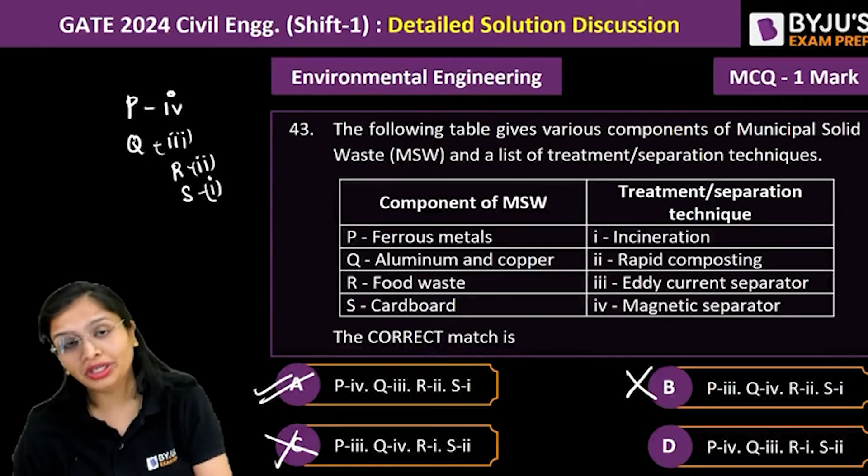Now, generally, if you're talking about which method of composting we use, we generally do the anaerobic method because you don't have to go turn the mixture every time. But still the Indore method is also practiced. If you ask me which is the prominent one we use, then we go for the anaerobic method, that is the Bangalore method of composting.

Now, question 44 — I told you, from the time MSQ has been introduced in any subject, whether they ask MSQ or not, it's definite they'll be asking MSQ from environmental engineering.

When two or more air pollutants combine, or combine in the presence of sunlight, you get secondary air pollutants. Ozone is a secondary air pollutant. Sulfuric acid is a secondary air pollutant.

Now moving to the next one. This is a good question, you have to think about it. For assessing compliance with the emission standards of incineration plants, corrections need to be applied. Okay, you have to apply the corrections.

Emission standard based on 11% oxygen for hydrochloric acid is 50 milligram per normal cubic meter, and the measured concentration of HCl and oxygen is given to you. Assuming if 21% oxygen is present in air, what is the correct statement?

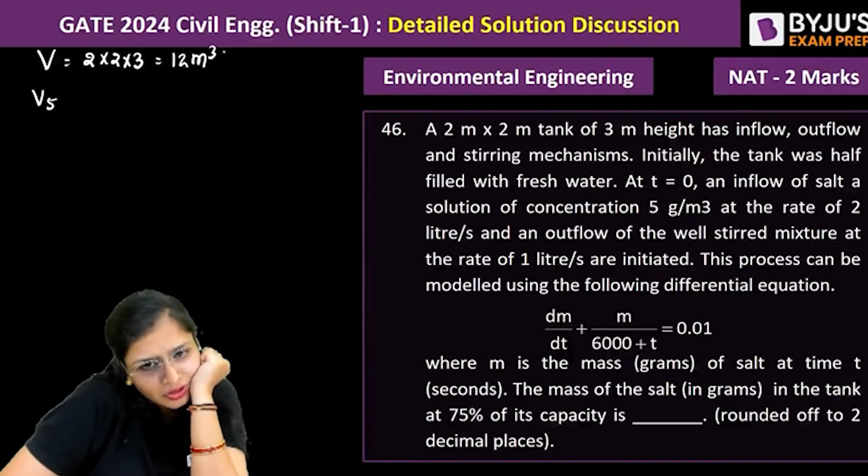So first let me calculate the total volume of the tank. Total volume will be 2 into 2 into 3, which is 12 cubic meter. Now initially the tank was half filled with water, so the volume of water corresponding to 50% of the capacity is 0.5 into 12, which is 6 cubic meter. Then it's asking how much mass is present at 75%.

So the mass present at 75% corresponds to 0.75 into 12.

9 meter cube. Now how much is it going from 50 to 75? So how much increase in volume has taken place? Delta V, that is increase in volume: 9 minus 6, 3 cubic meter.

Now you know that dS, change in storage with respect to time, is equal to inflow minus outflow. How much inflow is taking place? Inflow of the salt is happening at 2 liters per second and outflow is happening at 1 liter per second. So 2 minus 1, that is 1 liter per second.

Change in storage is given to you in the question, as you have calculated, 3 meter cube. 3 meter cube means 3000 liters, because 1 meter cube is equal to 1000 liters, and this is 1 liter per second. So this will give your time. Time is coming out to be 3000 seconds. But is this question asking me time?

No, but I need delta t, dt, right. This is the time we need to substitute here. This time you have to substitute here. Here, yes, my answer is correct, 9 came. I'm just checking: 0.75 into 12 is 9. So this is the time which you are getting.

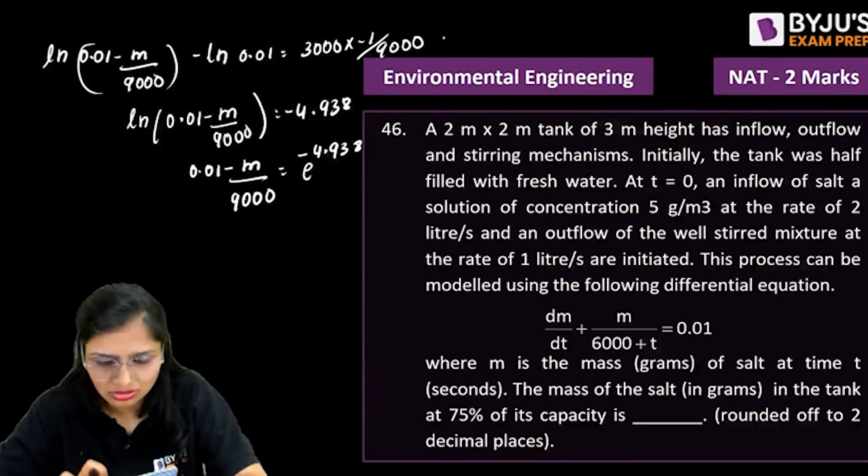This is your answer, so you can round it off as 25.48 grams. This will be your answer.

So yeah, this is a good question because you won't easily be able to solve it: volume corresponding to 50% capacity, then 75% capacity, then calculating how much increase is there, calculating the time, substituting it here, and then integrating it—all these things are involved. Now see, the concentration and all given is just for confusing you, not required. So this was the question. Now moving to the next question.

Activated carbon is used to remove a pollutant from wastewater in a mixed batch reactor, which follows first order kinetics. Reaction rate is given as 0.38 per day, and it is asking how much time is required to remove the pollutant by 95%.

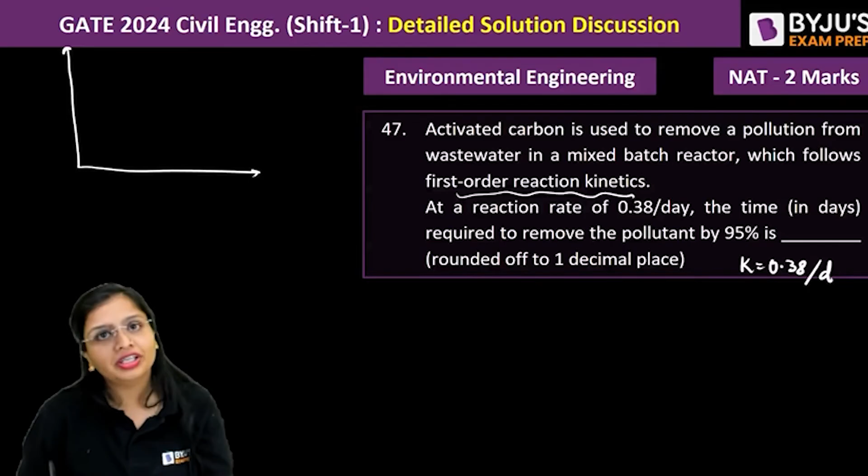When it says first order reaction kinetics, you know that means rate of change of parameter is directly proportional to the parameter. Like we did for BOD and for disinfection, Chick's law. So let us suppose at T equal to 0, the number of microorganisms is N naught. Then at T equal to T, the number of microorganisms is NT. Rate of change of parameter, since the parameter is number of microorganisms, is directly proportional to the microorganisms.

Now, with time the microorganisms are decreasing. Time is increasing, but the number of microorganisms, or whatever pollutant is there, is decreasing. So if one is increasing, another is decreasing. If you take increasing as positive, decreasing will be negative, or vice versa. So you substitute a negative sign here: dNt by dt. When you remove the proportionality sign, you get k constant times Nt.

Now you integrate it. At T equal to 0, the number of microorganisms is N naught. At T equal to T, the number of microorganisms is NT. On integration, this will come here. To properly integrate, you just need to substitute the values. So this is the one. Here integration is not possible directly between dt and nt, so you go like this.

Then you substitute T equal to 0, number of microorganisms N naught, and T equal to T, the number of microorganisms NT. A constant K is also there. So minus KT, and here it will be log NT. This will be upper limit minus lower limit.

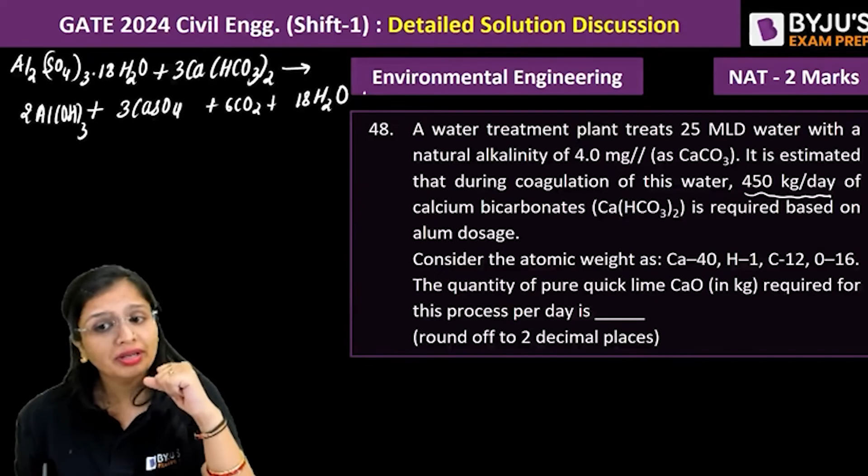Now if we do it in different manners. First of all, if you check it out, how much total alkalinity is present in water. For 1 liter, 4 mg alkalinity is required. So for 25 MLD, how much will be required?

Mg converted into kg. So this will be... okay, now listen to me. 100 kg per day of alkalinity as calcium carbonate is required for 25 MLD of water.

Now, how much calcium bicarbonate is present? 450 kg per day is present. So, first I need to calculate how much alum is already present. Okay, now check it out.

1 mole of filter alum requires 3 moles of bicarbonate alkalinity. I'll tell you the long cut and short cut, both methods. If you talk about the weight, it is 666. And if you talk about calcium bicarbonate weight: calcium is 40, twice of hydrogen is 1, carbon is 12, oxygen is 16.

So how much will it come? Let me check it out. 40 plus 2... 162. So 3 into 162 grams of bicarbonate alkalinity.

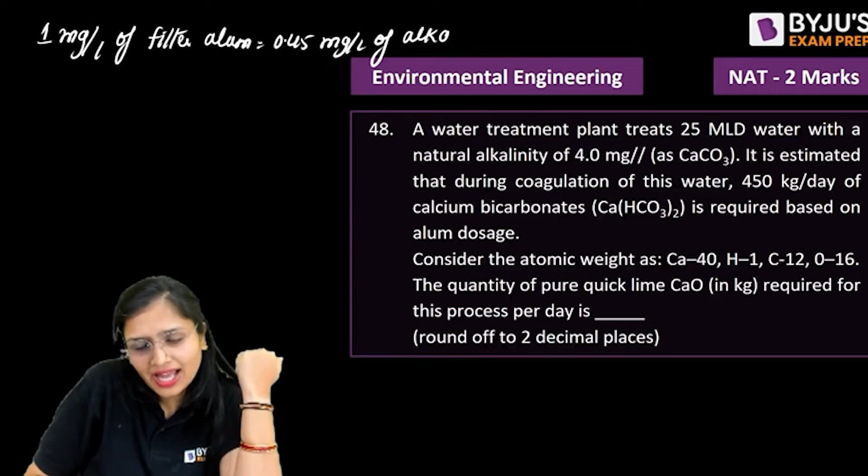So how much filter alum is there? 616.66 kg per day. This will require how much? So 616.66 kg per day into 0.45, that is, it will require 277.5 kg per day of alkalinity as calcium carbonate.

Okay, now in this question, additional anything is not being told to you. Now if I'm taking this only, I'll tell you two different approaches. Now calcium carbonate, if you want in water, this will come due to calcium oxide and carbon dioxide. So if you compare, 100 grams will require 56 grams of calcium oxide.

So 1 gram will require how much, or 1 milligram will require how much? 0.56. So now you can see, 1 mg per liter of alkalinity as calcium carbonate requires 0.56 mg per liter of calcium oxide.

So how much is given to you? 277.5 kg per day of alkalinity as calcium carbonate will require how much calcium oxide? So 0.56... from here you get it as 155.4 kg per day of calcium oxide. This will be your answer.

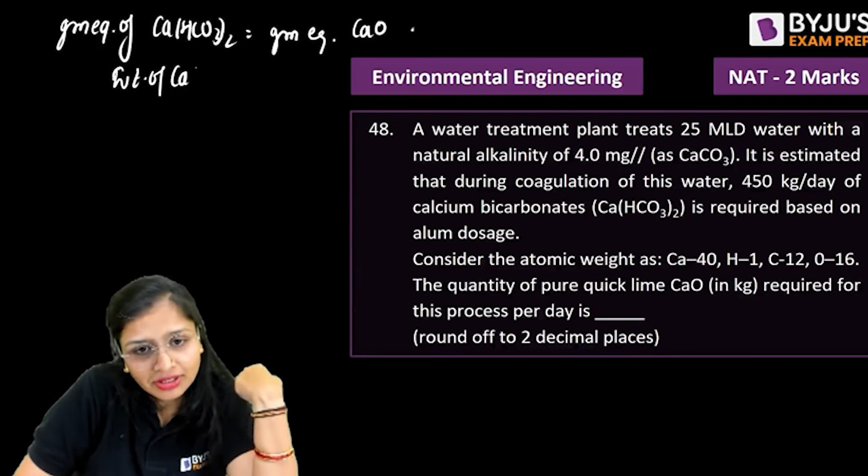Okay, so gram equivalents of calcium bicarbonate will be equal to the gram equivalents of calcium oxide. Okay, just wait. Gram equivalents mean what? Given weight of calcium bicarbonate divided by equivalent weight.

Calcium oxide weight, given weight, and equivalent weight. Weight of calcium bicarbonate given is 450 kg per day. Equivalent weight, if I calculate it from here: calcium is 40 plus 2 hydrogen is 1, carbon 12, oxygen 3 into 16 is 48. This will come out to be 162.

Now how much is given to you? 162, and equivalent weight is molecular weight by valency. So 162 by 2 will be 81. Equivalent weight of calcium oxide: calcium is 40, oxygen is 16, total 56. 56 by 2.

28. So from here the weight of calcium oxide will come out to be how much? 450 into 28 divided by 81. This will come out to be again around 155.55 kg per day.

Now the question is, some people mark this as the answer, but if you check it out, 4 mg per liter of alkalinity as calcium carbonate was already present. So you don't need to add the entire calcium oxide. You will require to add calcium oxide only for the amount of calcium carbonate which you require to be added additionally, not the whole thing.

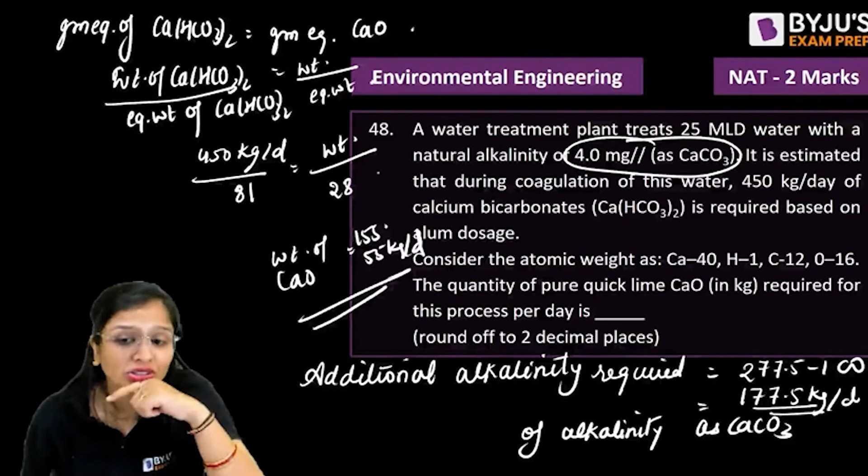100. So how much additional is required? Additional alkalinity required, because we need to add calcium oxide only for the extra amount required. So additional alkalinity required as calcium carbonate is 177.5 kg per day. For this we need to add calcium oxide, rather than for the full amount.

Now, if you know this, 1 mg per liter of alkalinity as calcium carbonate requires 0.56 mg per liter of calcium oxide. So how much is given to you? 177.5. So 177.5 kg per day will require how much? 99.4 kg per day of calcium oxide.

That's it. Why would we provide for the whole amount? Already 100 kg per day is present, so you do this calculation. So this will be your answer, 99.4. Technically this should be your answer, but in this question it should basically be told, though it is understood in a way that we will add it for the additional part only, right? So this will be your answer.

Okay, now moving to one question of irrigation. You know the same question came in forenoon and afternoon session. The only difference was here they asked about Chezy's equation, and in the afternoon they asked about Manning's equation. A round bottom triangular canal section is shown to you in the figure, bed slope given is 1 in 200, Chezy's constant 150, and it is asking how much depth is there if the discharge is 20 meter cube per second.

In the exam, I particularly don't think you need to derive it; rather, you should be able to do it quickly. Now, if you check it out, discharge is equal to area into velocity. Since it's told that it's Chezy's equation, velocity equals C root over RS. Discharge is given to you as 20. Area you don't know, hydraulic radius you don't know, slope you know, 1 upon 200.

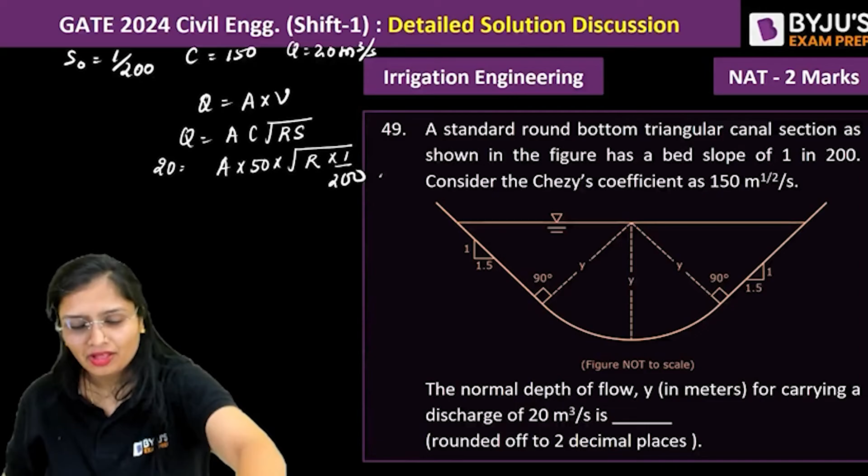How will you solve it? Come on, guys, how will you solve this question? Area is not given to you, hydraulic radius is not given to you. Hydraulic radius is the ratio of wetted area to the wetted perimeter. Come on, think, by that time I'll add the slide. Got it or not?

Now see, side slope is given to you: 1 vertical is to 1.5 horizontal. Can you calculate theta from here? Side slope is given to you. You know tan theta equals perpendicular by base, that is 1 upon 1.5. From here cot theta will be 1.5, and if I calculate theta, it will be tan inverse of 1 upon 1.5.

First I want it in degrees, so I'll do shift mode and put it in degrees. Then tan inverse 1 upon 1.5. This will come out to be 33.69 degrees. Now same thing if I want it in terms of radian.

0.588 radian, this was in degree converted to 0.588 radian. Now from here, calculate the area. There will be two triangles and one semicircular part. Similarly, you will calculate the perimeter.

Area formula, if you remember, is y square into theta plus cot theta. Theta you substitute in radian, 0.588, and cot theta already you know is 1.5. Don't waste your time, just calculate. So 0.588 plus 1.5, that is 2.088.

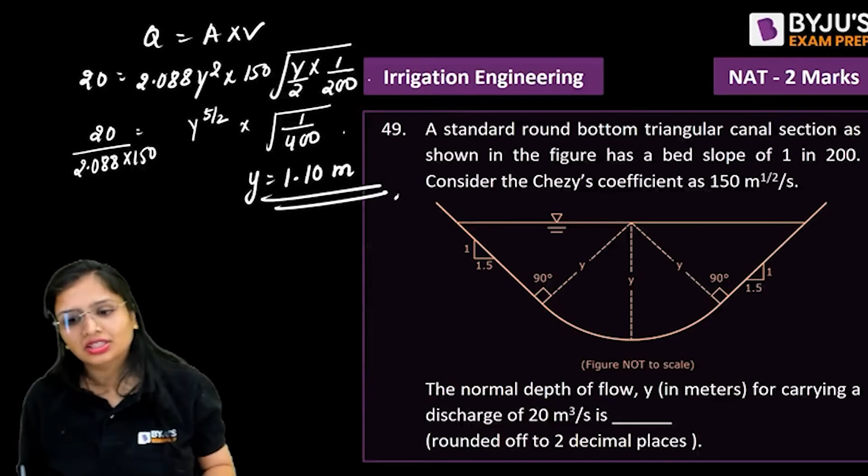Simple, okay fine. Similarly, now we'll start with construction planning and management. There were questions related to construction planning and management, so we'll do questions related to it.

Double declining balance method, straight line method. Straight line method is easy, nothing much to do in it. Initial cost 1 lakh, salvage value 10,000. How much it is asking, after how many years? 5 years. So 1 lakh minus 10,000, that is 90,000, divided by 5. This is 18,000. This is the value.

Now calculating it by double declining balance method. It is asking depreciation in year 2. The fixed factor FDDB will be 2 by n, so 2 by 5, that is 0.4. The first value: fixed factor is 0.4, and initial cost is 1 lakh, so the depreciation value comes out to be 40,000.

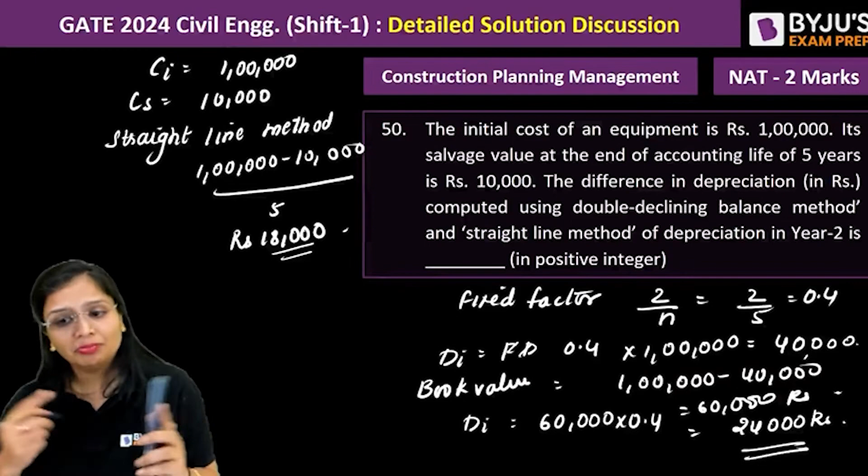Here you have to calculate the fixed factor. Then on 1 lakh, depreciation is 0.4, so book value remaining is 60,000. Next year, 60,000 into 0.4, that is 24,000. So the difference comes out to be 6,000 rupees.

Clear? Okay, now let's move towards structure analysis.

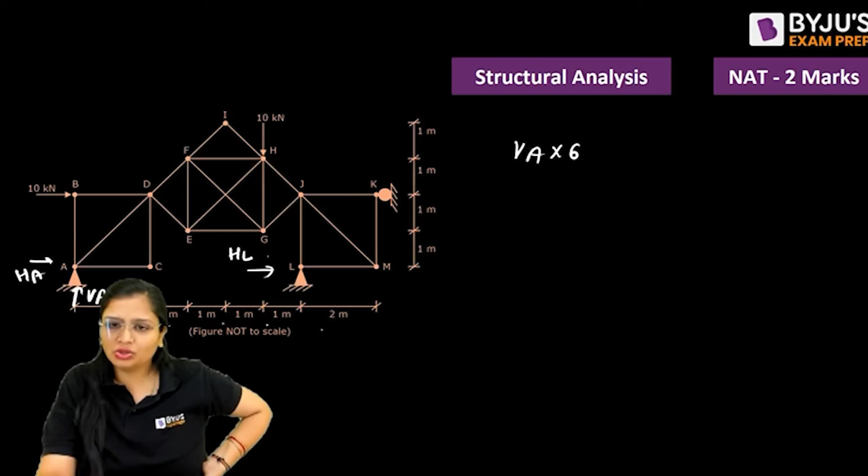After that, HA into the distance will be how much? 1 plus 1, that's 2, so minus HA into 2. Apart from that, what else moment can I take? Oh, this 10 kilonewton is also acting, so minus 10 into 1.

This is equal to 0. Now, how will I solve it? 6VA minus 2HA is equal to 10, and we just found that VA is equal to HA. So what can I do? Now you can ask me, ma'am, won't HL also be there, because right now I haven't taken the horizontal reaction at L, but that can also be there.

So if you take a moment, HL into 2, if you take a moment about J and check it out, HL into 2 is equal to 0.

So the horizontal reaction at L is 0, so that's why I'm not considering it here. It was understood by visualization also, but I've done it and shown it to you. Now VA and HA are same, just calculated it.

So from here, can I write it as 6VA minus 2VA is equal to 10? So 4VA is equal to 10. So VA will become how much? 10 by 4, that is 5 by 2, that is 2.5 kilonewton. That's it, now your question is solved.

The moment you know VA, you can calculate VL. 10 minus 2.5, that is 7.5 kilonewton. So this will be your answer. So 3 times you have to apply: first summation of vertical forces, and you have to apply moments about J and calculate it, but you have done it. Clear? Simple question.

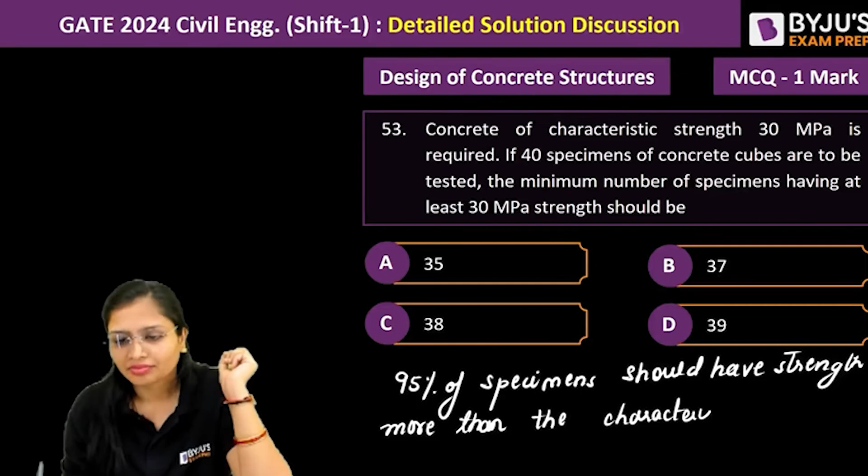So from here 95%, that is 0.95. And how many specimens are there? 40 specimens are there. So if I do 0.95 into 40, this will come out to be the minimum number of specimens that should have at least 30 MPa of strength - that is 38 samples minimum. If samples more than that are there, that is also okay, but minimum 38 samples should have strength more than 30 MPa.

Okay, now moving to the next question. Consider a balanced doubly reinforced concrete section. If the material and other sectional properties are not changed, what is the case when the section will become under-reinforced? If you calculate the depth, or you can say the neutral axis - since it's a balanced doubly reinforced concrete section - how can I calculate it?

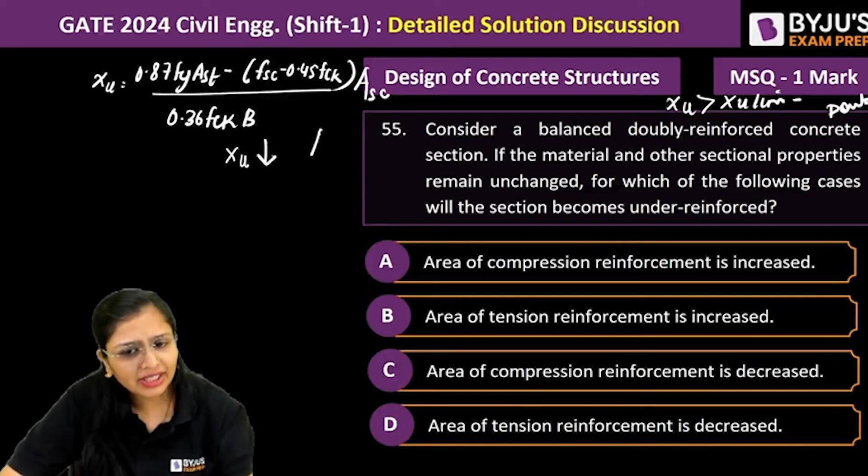How can XU become less? The answer is in front of you. If I increase the area of compression reinforcement, since it appears with a minus sign, the overall value will decrease. And if I decrease the area of tension reinforcement, I'm decreasing this value and increasing that one, so overall XU value will decrease. So what I can do is increase the area of compression reinforcement and decrease the area of tension reinforcement. Since this is an MSQ question, more than one answer can be correct, so I'll apply both, making this section an under-reinforced section.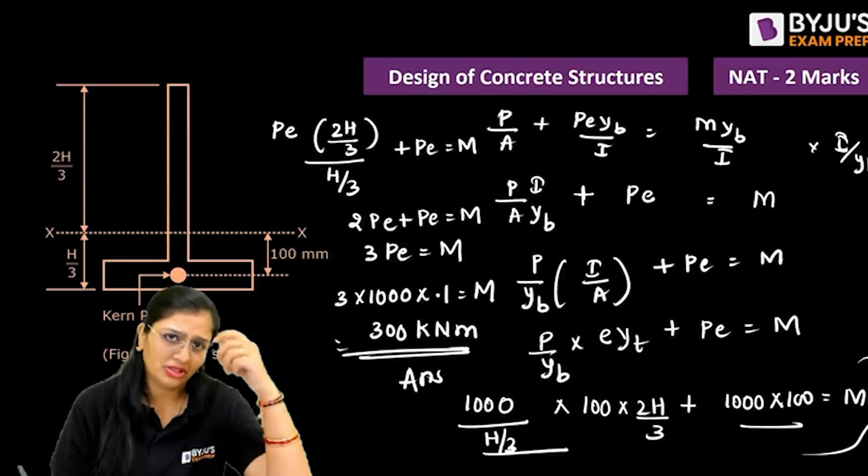3000 kilonewton and E is 100, so you can take it as 0.1 meter. This is equal to M, so from here you get 300 kilonewton meter - this is the moment. So instead of doing it twice, you can skip this step and it becomes easy. You'll get 300 kilonewton meter, I don't need to calculate. We've become so addicted to calculators, even 1 point decimals give us fear. But here the answer will be 300 kilonewton.

Now the last question of concrete structure. A slab panel with an effective depth of 250 mm is reinforced with 0.2% main reinforcement, using 8 mm steel bars. It's asking for the center to center spacing at which the 8 mm diameter bars are placed in the slab panel. How will you calculate it? Come on guys, how will you calculate the center to center spacing? I personally don't know why they asked it for 2 marks, this was a very simple question, this is basic.

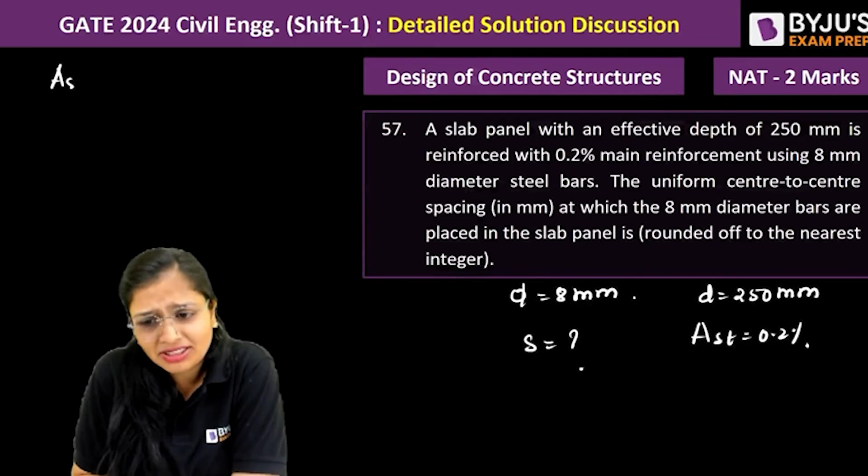AST percentage given to you is 0.2%. This means AST upon BD into 100. They have given 0.2%, so take 0.2 by 100 equals AST upon BD. Area of steel can be written as number of bars into pi by 4 d square, over b into d. Number of bars equals width divided by spacing. So 0.2 by 100, and d will get cancelled from here - width by spacing.

What was there in this question? I can't find anything there, so you guys can check it out from here.

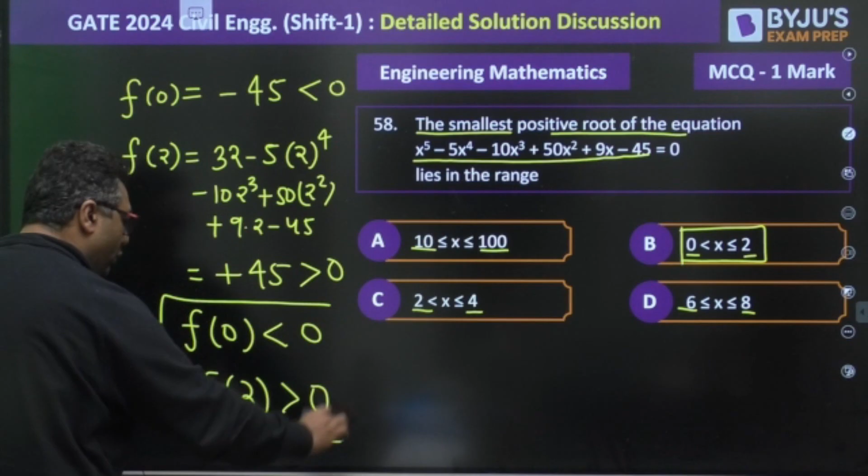So dear, if f of 0 is less than 0 and f of 2 is more than 0, it simply means that if I take the x-axis, at f of 0 some value is negative, and at 2 it is positive. So it means obviously this curve is passing like that, so the root would be lying between 0 and 2. If a root is lying between 0 and 2, it would be the shortest one. Maybe some roots are there between other options also, but this root will be smallest of all. So the answer will be B for this.

This question basically is a numerical method question. Moving further to the next question, this question is saying the second order differential equation in an unknown function u(x,y) is defined as.

So you can see, this is del square u by del x square equals 2. This is given. They are saying assume g(x), f(y), h(y), the general solution of the above differential equation is. So we will go for integration.

Integration of del square u upon del x square equals what? It is 2 integration of, as you are integrating here, 1 dx plus some function f(y), this is the integration constant. Then, if you integrate, this becomes del u by del x, which is 2x, plus f(y).

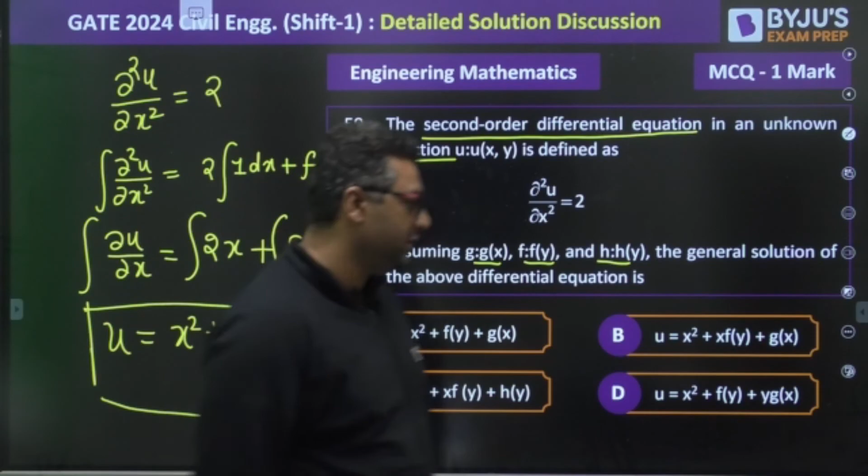C is looking like the correct answer. X square plus x into f(y) plus h(y) is going to be the right answer. I hope everybody is getting it, because we are considering this to be the integration constant. Is it clear? Shall we move on? Yes, so this is the question from differential equations.

Moving further to the next question, guys, this question is from mathematics. The probability that a student passes only in mathematics, when we say only in mathematics, I am writing it as 1 by 3. Probability that he passes only in English is 4 by 9. And when they say passing in both, it is going to be 1 by 6. Actually, it can be better understood from the Venn diagram.

So if I say this is the case, only in mathematics means this part, if he says only in English means this part, and the intersection is giving us both.

So if you want the probability of getting at least pass in one, you know that probability of M union E will be the summation of all the three areas. You would be having 1 by 3 plus 4 by 9 plus 1 by 6. Taking 18 as LCM, you get 6, 8, and 3, which sums to 8 and 6 is 14 and 3 is 17 by 18. Answer will be A for this.

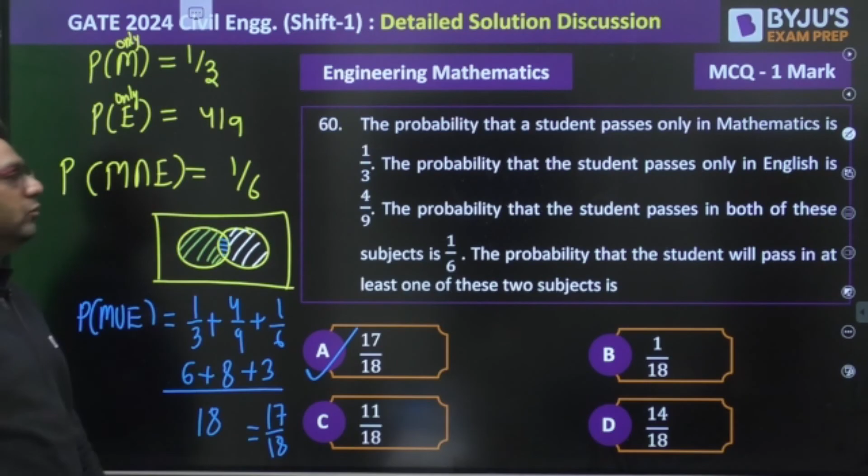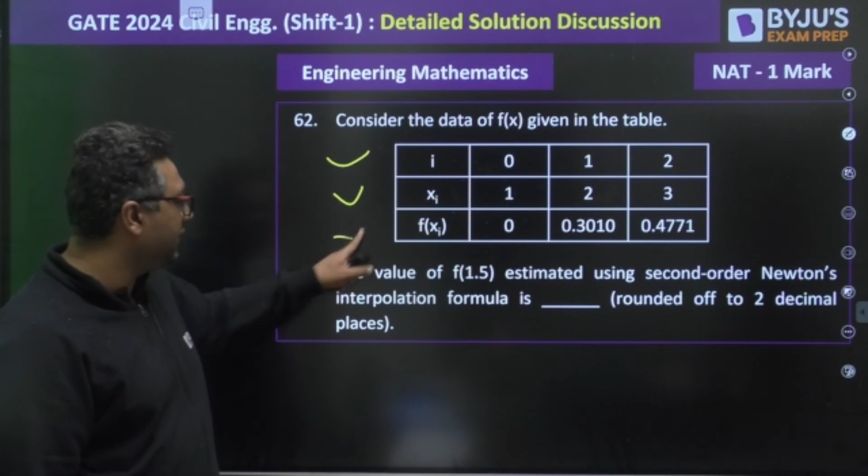Moving further to the question, guys. Next question is, guys, from numerical methods. This is the second question from numerical method. This is NAT for 1 mark. According to 1 mark, calculations were more. Consider the data i, xi, fxi are given to us. The value of f at 1.5 estimated using second order Newton's interpolation formula is. So you need to apply Newton's second order interpolation formula.

You know that is y, which is equals to fx. We can write it as y1 plus y2 minus y1 by x2 minus x1 into x minus x1. This is the first order interpolation formula. Okay, so like this is the first order interpolation formula. Similarly, we can go for the second order interpolation formula as well.

Is it clear, guys? So let us see that when we are talking about the second order interpolation formula, y is equals to, or we can say fx is equals to, it is going to be y1 plus y2 minus y1 upon x2 minus x1 into x minus x1. After writing this, we would be adding one more term, that will be y3 minus y2 divided by x3 minus x2, and then we will be going for minus of y2 minus y1 divided by x2 minus x1, divided by x3 minus x1, into x minus x1 into x minus x2. This is the second order interpolation formula.

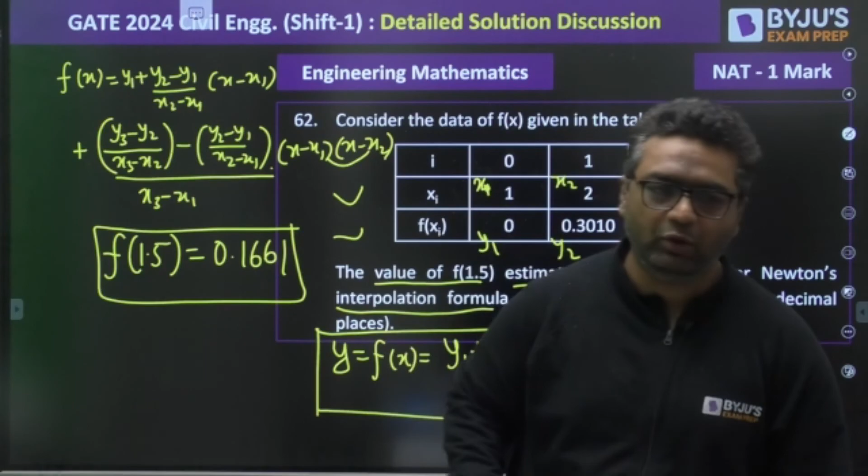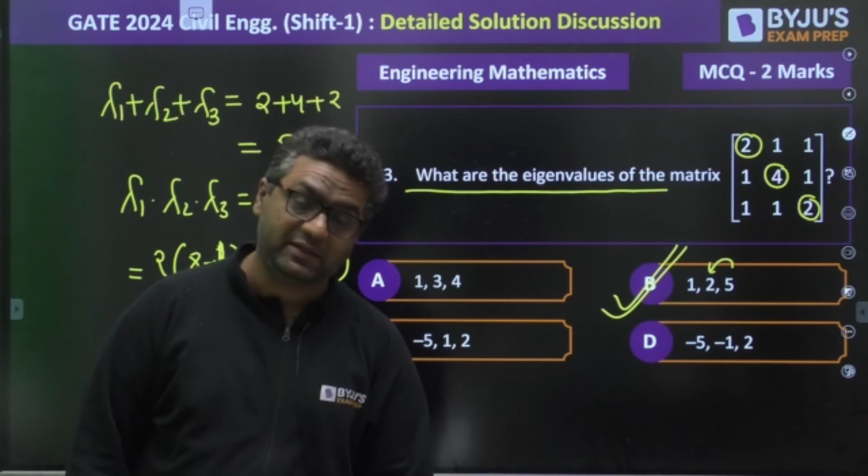Let me cross check as well because I have already done them for you. What is the right answer? Yes, 1, 2 and 5 is correct. Moving further guys, moving further.

Next question. This is a lengthy question, slightly looking like a vector field. This is MCQ for 2 marks. A vector field P, this is given as, and R is given as. So consider the statement P and Q. Curl of the gradient of the scalar field R is a null vector.

Okay, so first of all we will go for the gradient of R. But what is P? You can see P, they are saying that it is the curl of the gradient of the scalar field R, and divergence of curl of the vector field P is 0. These are the two statements they have given. So guys, when you will be solving this, how you will be solving this, you know that. First of all, we will be talking about the gradient of R, that is I cap del by del x of R plus j cap del by del y of R plus k cap del by del z of R.

Okay guys, so we already have the R vector. So when you will be going for the gradient of R, gradient of R is I cap del R by del x. So you will be having this as 12x. What is other x? This is minus 9yz, minus 9yz. This is minus 2y, minus 2y. And what is other term? It is plus 3z.

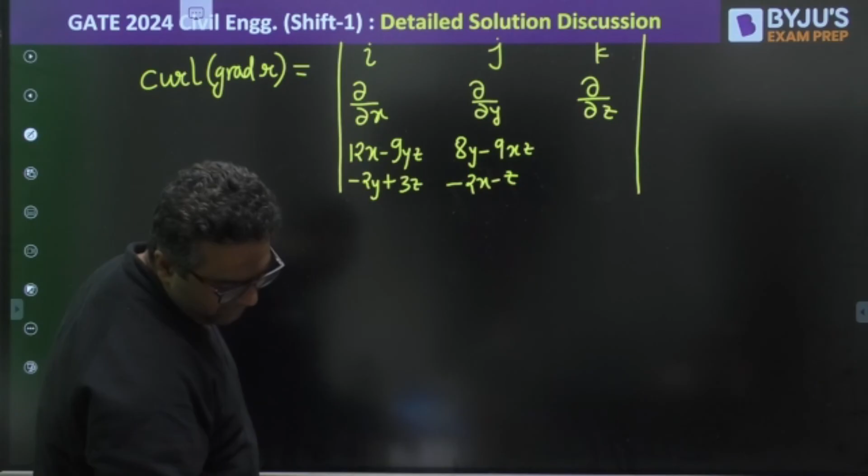And now I will be putting those values which we have just calculated. Okay, so it is 12x minus 9yz minus 2y plus 3z. Then I will be putting the second term, this 8y minus 9xz, then minus 2x minus z. Let me cross check 8y. Yes, it is going to be 8y, yes, minus this z is correct only.

The last term is minus 2z minus 9xy. Look dear, why I am checking it? Because I am also human being, calculation mistake is a very common thing anybody can do. Okay, 2z minus 9xy. Then we have plus 3x minus y.

So this is going to be the values. Now we will be solving it. It would be coming out to be i cap. This will be cross multiplied. Del by del y, you will be doing. It will be coming out to be minus 9x, minus 1. Then I will be going for minus sign. This is minus 9x minus 1. Then minus sign, this will be multiplied by this. So del by del z will give us minus 9x and this will be giving minus 1. Can you feel it?

So what we are going to do, when I am writing i cap, I am multiplying this and then this. Similarly, for j cap, we write with the minus sign as per the matrix calculations. So I would be putting a minus sign here. For j cap, this will be multiplied by del by del x. So it will be minus 9y plus 3, because these are the two terms having partial derivative with respect to x. Then del by del z multiplied with this, so minus, when multiplied, it will be coming out to be minus 9y plus 3 once again. Then I would be writing plus k cap.

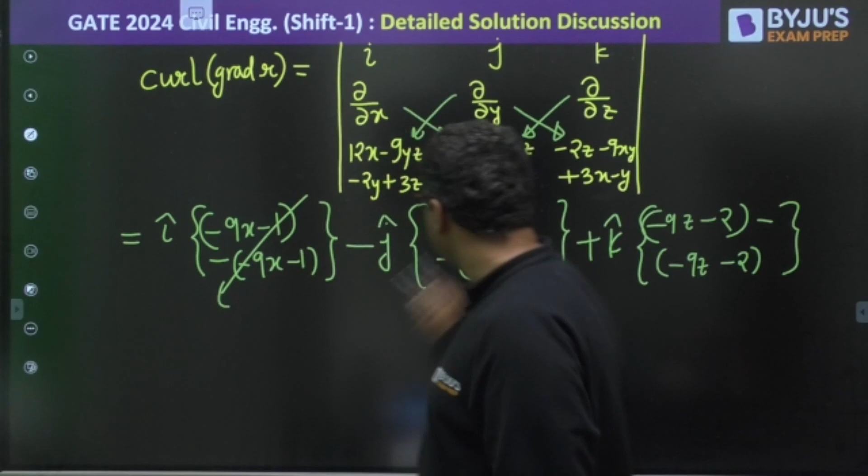For plus k cap, it will be multiplied by this minus this. So del by del x, when I will be doing, it will be minus 9z and minus 2. Then minus sign, this will be multiplied here, giving minus 9z minus 2. You can see all the terms are cancelling with each other. So you are going to get this vector to be 0. So this P vector is coming out to be 0. So you have seen curl of gradient of a scalar field vector is a null vector. That is a correct statement.

Divergence of curl of the vector field P - we have already calculated this to be a 0 vector. So when you go for the divergence of this, it is also going to be 0. So P and Q, both statements are true. Answer will be A for this. P is also true, Q is also true. Answer will be A for this.

Guys, moving to the last question. This was a very lengthy, calculative question, but I have done it in front of you. Last question, guys - this is once again from the probability and statistics part. So when we are talking about probability and statistics, what is the question they are saying?

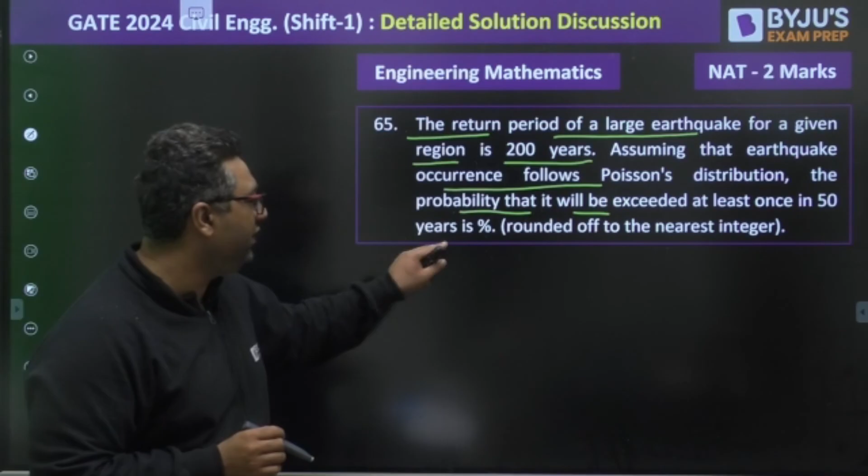So guys, now we are moving to the last question, that is an NAT for 2 marks. The return period of a large earthquake for a given region is 200 years, and assuming earthquake occurrence follows Poisson distribution, find the probability that it will be exceeded at least once in 50 years, in percentage. First of all, lambda will be n into p. So when you find n into p, it is going to be 50 by 200. Once in 200 years they are saying, and what is that - it is going to be, for 50 years, 1 by 4, which is 0.25.

So we need to find out the risk. The risk is going to be 1 minus (lambda to the power r divided by r factorial) into e to the power minus lambda. We will be putting lambda to be NP, and r to be 0. You would be getting 1 minus (0.25 to the power 0, e to the power minus 0.25) divided by 0 factorial. The answer comes out to be 0.2211, which you can also write as 22.11%, because they are asking the answer in percentage.